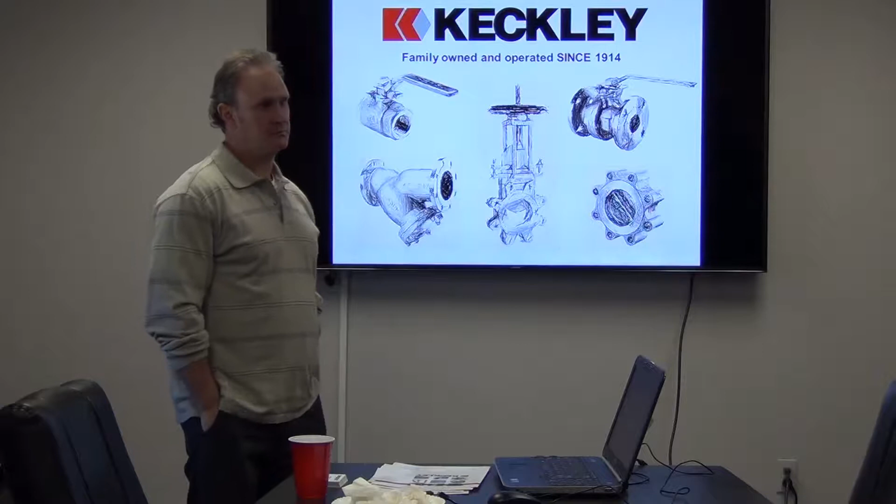Okay, so my name is Andrew Morrow. I'm an independent manufacturer's rep. I don't have any inventory, I don't do any buy-sell. So I'm just literally a catalog and a handshake, a glorified salesperson. I don't have anybody working with me. So those are the lines that I do represent.

I've been doing it this is my 24th year. My father started my company in '75. He worked for Bonney Forge, he was the Bonney Forge sales manager from '65 to '75. My brother is a waterworks rep. I've been working with Keckley now since the end of 2015, so a little over three and a half years.

Mike hired me. It's been a really good working relationship. Our sales has improved for my territory since we've been working together, but with your company, you've been stocking our product a long time, and it's remained a little flat. So we need to kind of see if we can work together and improve that.

These guys are very good at working with distributors and making sure that we help the distributors out to work with the end users and get our product into the marketplace. Mike does a real good job with that. He's always available. We'll come in and see an end user if he has to. I will help with that as well.

But let's see if we can work together and get some of our products and try to beat our competition a little bit more. So that's why we're doing this. We've done this with other distributors, and it's been successful. And Mike flew in today in the wind, so... it's kind of a ride, you know.

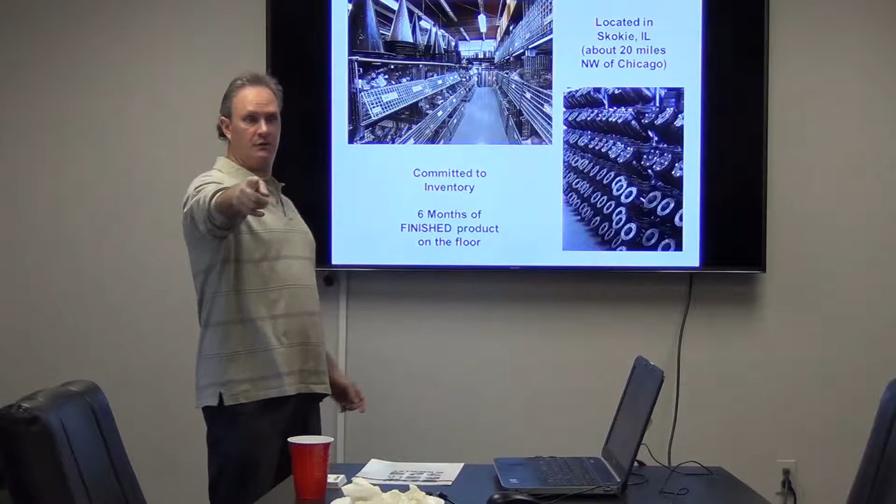The biggest thing I want you to take away from this is that Keckley has inventory. As Andrew said, we support distribution, we don't sell anything direct. If end users come to us, they go to our website and fill out a form requesting a quote or more information. We look at the territory - hey, it's by York, PA - and it goes to you guys, or I send it to Andrew and he lets you guys know. So you guys would be the ones to get the lead.

We'll basically grease the skids for you by going in and giving that end user all the information - this is what you're looking for, this is what we offer. Sometimes they ask for things we don't have, and I'll say here's what you're going to be asking for. I've got stock, now I'm going to send you to distribution and they're going to give you the price.

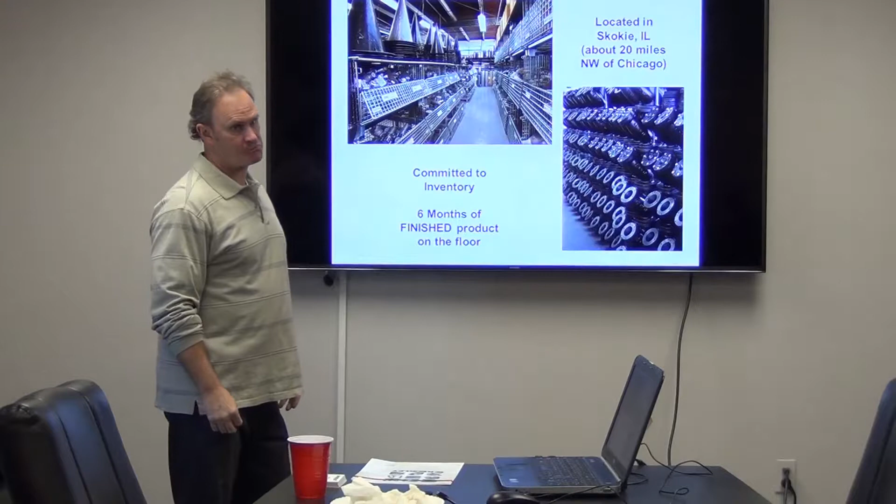So I get about 5 or 6 of these calls a week from end users coming to our website. I call them, and after they send me an email, I feel them out as to where they are, and secondly what distributors they normally deal with, and then I give them a salesperson's name. That happens all the time.

I think in a lot of cases it could be an engineering firm specifying our product on a project. It could be a contractor who just needs a price - I just need to buy a basket strainer. Simple as that. It could be an end user, an OEM that's designing something and has questions.

So usually I try and get that guy ready before I get it to Andrew and to you guys, and then the pricing becomes very easy. You already have a part number and they already know it's in stock. All they need to do is get a price. But the biggest thing here is the inventory.

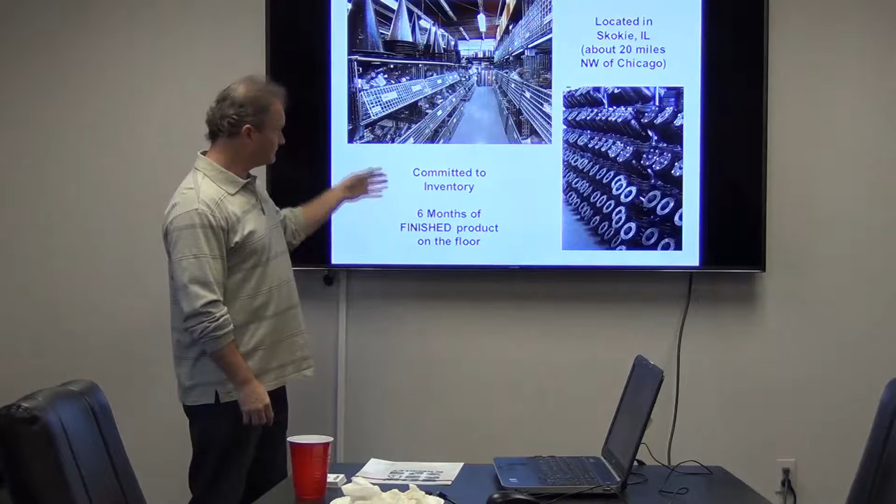No joke, this is what it looks like in our factory - just rows and rows of product. What's that mean for you? When you place an order, it usually ships within a couple days. That's very important - service is what we're all banking on, right? We want to get these products in the customer's hands as quick as possible.

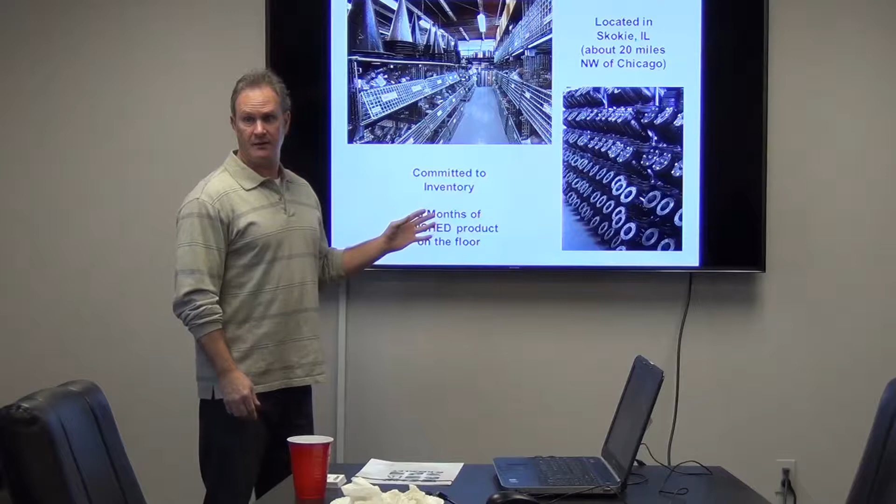We have so much product that if you were to call in, one of our inside sales people, or even myself, might say it could take a day or two to get it out, and that's because we have a secondary warehouse. We were busting at the seams. So we have a Keckley truck that makes the milk run, as I call it, twice a day.

Once at about 7 in the morning, and then once at about 12:30. So we capture orders that came in the night before, or orders that came in right before lunch. Then we bring it - we can't ship out of the other location, it's strictly warehouse - we get it to the Skokie facility, the one on my card, 10 minutes down the road, we bring it in, do whatever we have to do, get it out the door.

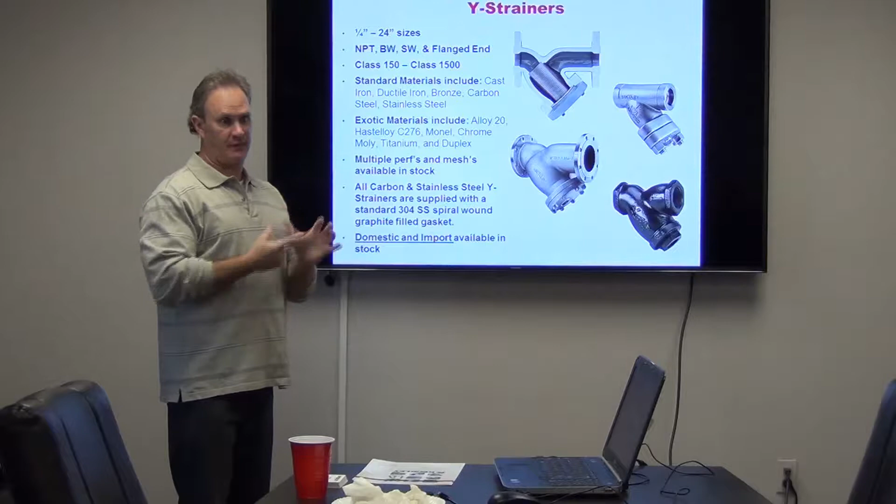There's a lot of information, but we're going to make it very easy. Y strainers still - if you look at the scope, I don't have some fancy pie chart to show you, but when you think about Keckley, still 60% of what we do is Y strainers, basket strainers, fabricated strainers, duplex strainers, temporary strainers. Strainers is still 60% of everything we do. We have other lines that we're going to go over so you have a good scope, but this is still our number one.

For those of you who are new, I'll make it real simple. The reason why you put one of these in line - you have your flow going from left to right, and somewhere down here is a piece of capital equipment, a pump or something you want to protect. This Y strainer, the media comes in and goes out, and whatever debris we want to remove from the line gets caught in that screen. Simple as that. You'll see on a basket strainer it's the same thing, just a basket strainer. But that's what a Y strainer is.

When we talk about terminology - screens, and I call this the strainer. The whole thing is the strainer, and I call that the screen. That's a replaceable part.

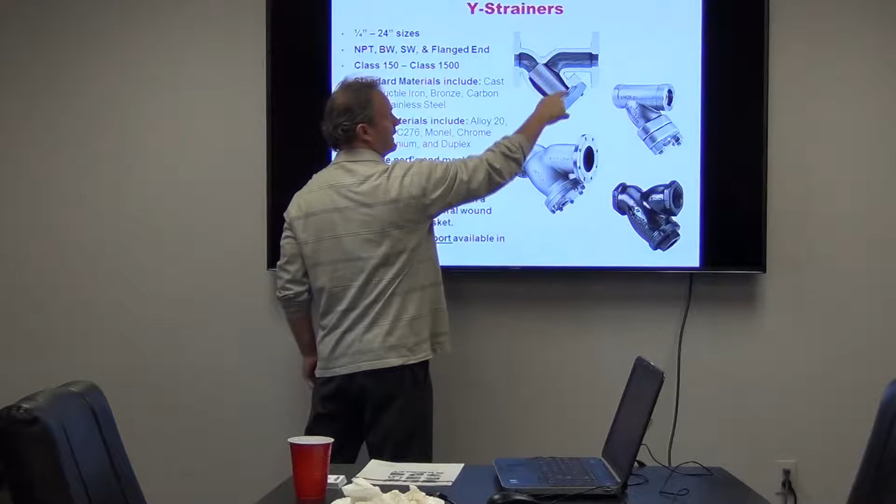We build and ship those all day long, and then you have a gasket right here. Those are the two items that probably get ordered the most from us because somebody's always changing out a screen or they take it out and clean it.

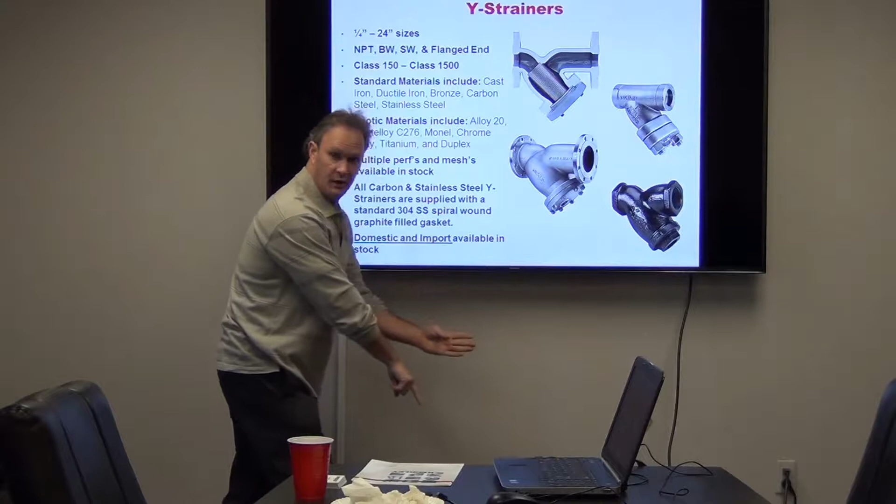The other way they might do it on a Y strainer is you notice how there's an open hole right here. That's what we call the blow-off connection. Instead of having to remove this cover, take the screen out, clean it, put it back in and bolt it back up, they could put a nipple and a ball valve on that and just blow the debris out. So they might have this Y strainer sitting down low in line, with the ball valve pointing toward a drain, and they could just blow the debris out with the pressure from the system. That's why you have those blow-off connections on all these. That one doesn't have it, but every one of these has a blow-off connection.

Okay, so lots of sizes, right? We go 1/4 inch all the way up to 24 inch. Threaded, butt weld, socket weld, and flanged end connections, okay?

The class is just your class of flange, like 250-pound threaded or 150-pound flange. So different classes of strainer that we have, and that's to handle the pressure. And now we're talking about pressure. 150 is obviously not going to handle a certain amount. The 1500 is going to be high pressure, like 3700 pressure. We can handle a very high pressure line.

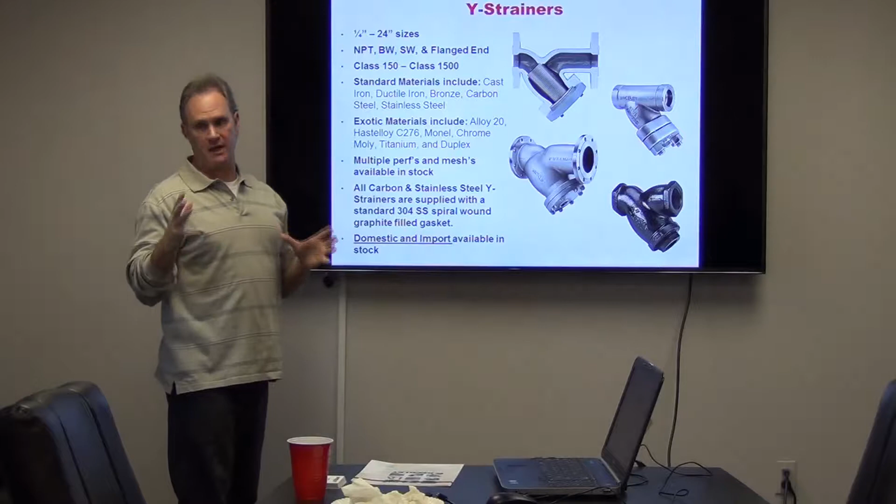This is the main thing you want to look at. Standard materials: cast iron, bronze, lead-free bronze, ductile iron, carbon steel, and stainless. Those are the main ones that are going to be on the shelf. But in some instances, you're going to have people that want something unique, right? So they're going to want an alloy 20 or a Monel or a chrome moly. Titanium - you know what, you want to sell titanium strainers. Really expensive. It's got to be on the right line, right? It depends on the application. That's why you would use a different type of material versus cast iron, which isn't going to be able to hold up to certain medias.

Multiple perfs and meshes - that's our screens. We build them all day long, a couple days out the door after an order comes in.

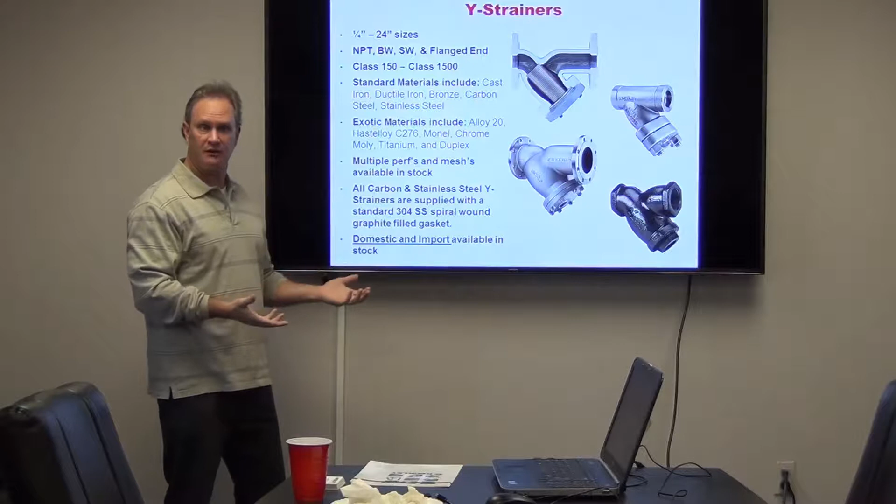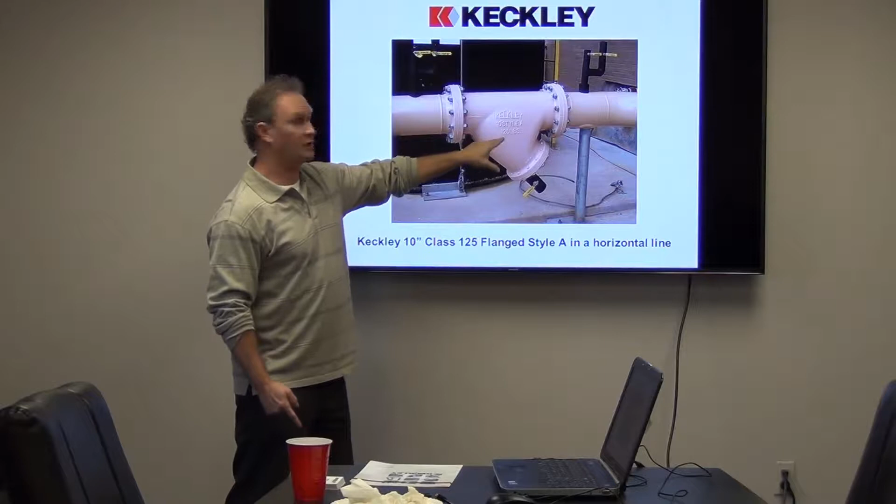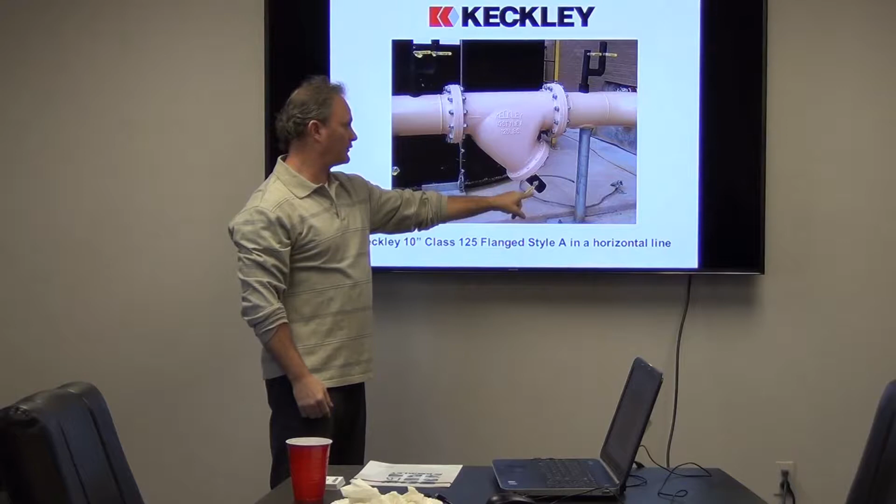We're going to go through these quick, these are just visuals, right? Remember we talked about the line? Here's the flow. This is a 10-inch, 125-pound cast iron in line. We got the flow arrow so we know which way it goes. You could put these things in a vertical position, but you'd always want to have the Y pointing down. So as long as the flow is coming down this way and not going up - obviously you don't want to have your Y strainer pointing up. There's an instance where they have the ball valve there to blow the debris out. They don't want to have to open a 10-inch each time, okay?

Question always comes up: why use a basket strainer over a Y strainer? It's really pretty much preference. Sometimes they want a basket strainer, sometimes they want to use a Y. Basket strainers take up less space too.

Yeah, it could. When we talk about face-to-face dimensions, that's the flange to flange, and it could be less. But you can't hook a ball valve to it and blow the debris out. You have to remove the cover.

If you look in this brochure, up at the top where it says basket strainers, you'll see some of those have knobs on top, that's a hand tightening knob. So they can do that without pulling a wrench out to open it up. That becomes a very big selling point for people putting in basket strainers, because now I don't have to turn a wrench, I can just hand tighten, but your pressure's lower. You're not going to be able to get that in a 300-pound flange, you have to do that in a 150. You can't have high pressure with those hand tightening knobs.

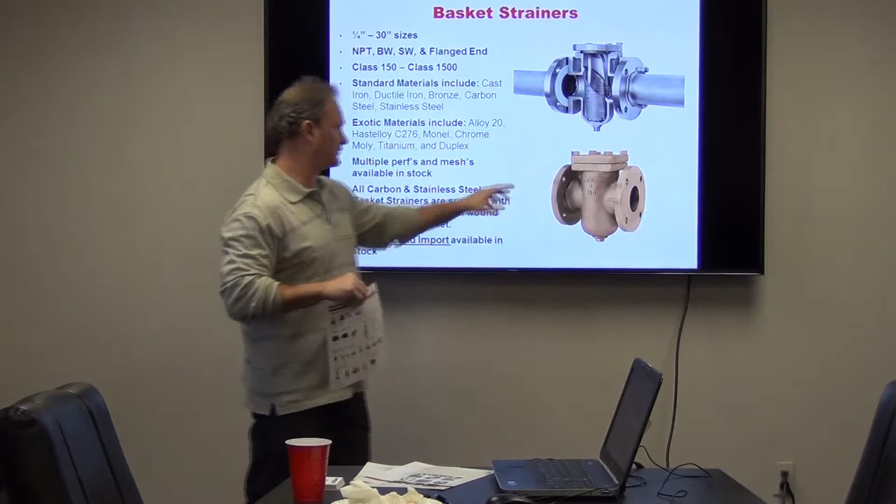This picture doesn't show it, but just so you know that is an option. It doesn't always have to be a bolted cover. Once again, sizes 1/4 inch to 30 inch. When you get to 30 inch, it's fabricated, so you want to make sure we don't have a cast unit that's 30 inch. Same deal on the connections: threaded, butt weld, socket weld, and flange. 150 pound all the way up to 1,500 pound.

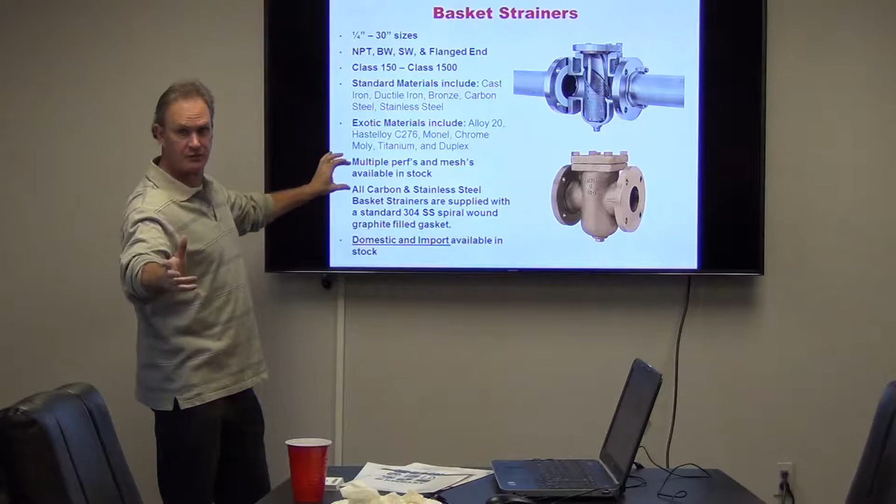Our standard materials look kind of like our last slide: cast iron, ductile iron, bronze, lead-free bronze, carbon steel, stainless steel. We can get the exotic alloys if we need to. Multiple perfs and meshes, we make screens all day long. And standard gaskets, we supply standard gaskets. There are special gaskets you can get too, but it depends on the application, and domestic and import available.

There are all types of applications. These things are found in high-rise buildings, universities, hospitals. I'll give you one: Hershey's, chocolate. They have them in the chocolate. You tell me it's going into a plant that's producing chocolate, the first thing I'm going to tell you is it's going to be stainless steel. They don't want carbon steel or cast iron. It's going to be a stainless steel basket strainer, and they use them.

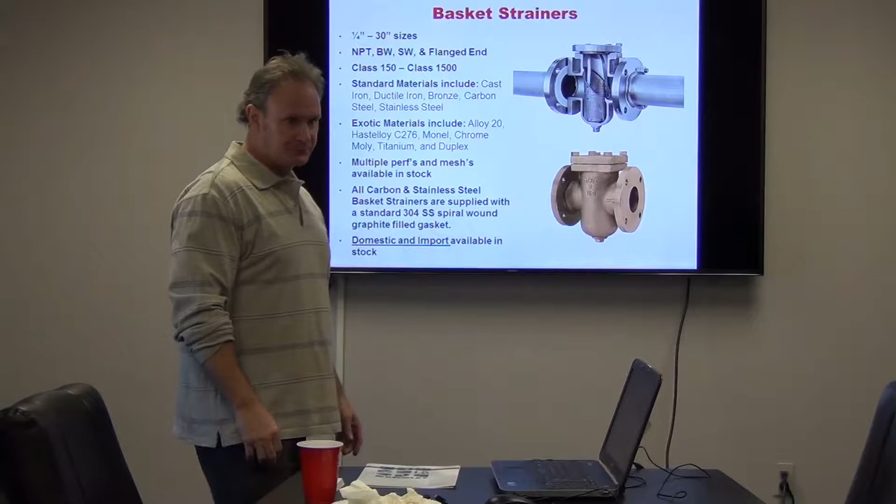But a new high-rise building in Philadelphia will have $100,000 worth of cast iron strainers. Again, why are they putting in Y strainers and basket strainers? Because they want to protect some capital equipment downstream, period. We'll talk a little bit about other ways to do it too, there's a couple other ways.

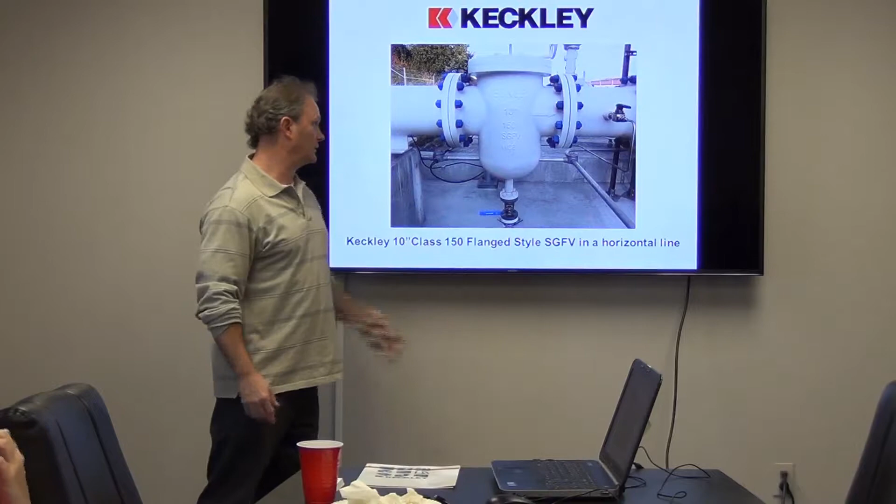This just shows one in line. Once again, they have a ball valve there, but that's strictly to drain it, not to blow the debris out. They still have to remove a cover. That's a 10-inch, carbon steel unit on a line. A lot of times, how that looks great and new and everything, these contractors will find one that doesn't look new, looks like it's been there for 30 years, but it'll say Keckley on it, and they'll call you to replace it as a Keckley.

A screen or a gasket. Now that's where things get a little tricky. Sometimes you call in and say, I've got a guy who needs a replacement screen. Is it a Keckley? Yeah. Okay, which one is it? I don't know. Okay, we got to find that out, we got to find out what it is.

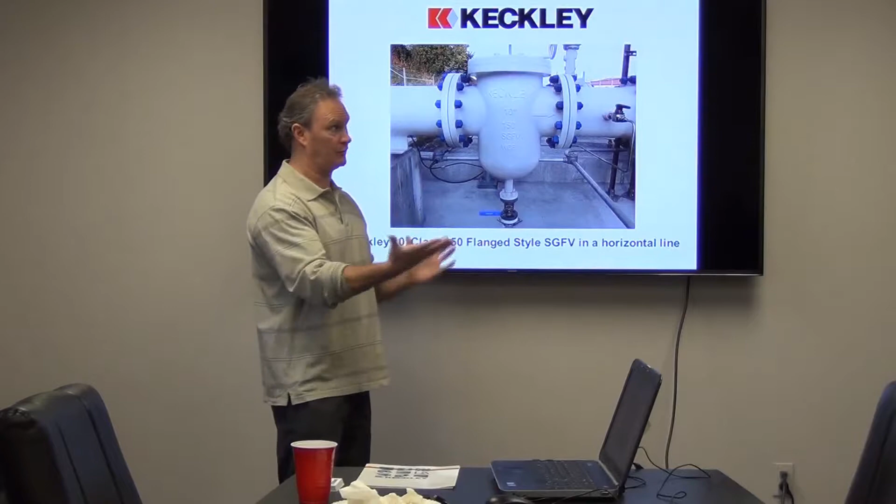Sometimes there's insulation on these, they sit out in a plant or somewhere there's insulation. We got to find out what it is. We can always take the dimensional measurements, that's a little more work than just saying, oh it's an SGFV, it's a carbon steel, or it's a D, or an A7 or something. So those are things that'll come up when you're ordering screens and gaskets. We got to identify what it is so we make the screen to the right dimensions. They're all different, every screen is different, and every screen is different from us to our competitors.

So if it's Mueller or Titan, our screens don't fit theirs, theirs don't fit us. What we can do is build screens for our competitors, but because we don't have a master file, we need the dimensions, and we can build those if it ever comes up. Ideally you'd just go right to them, but we do it.

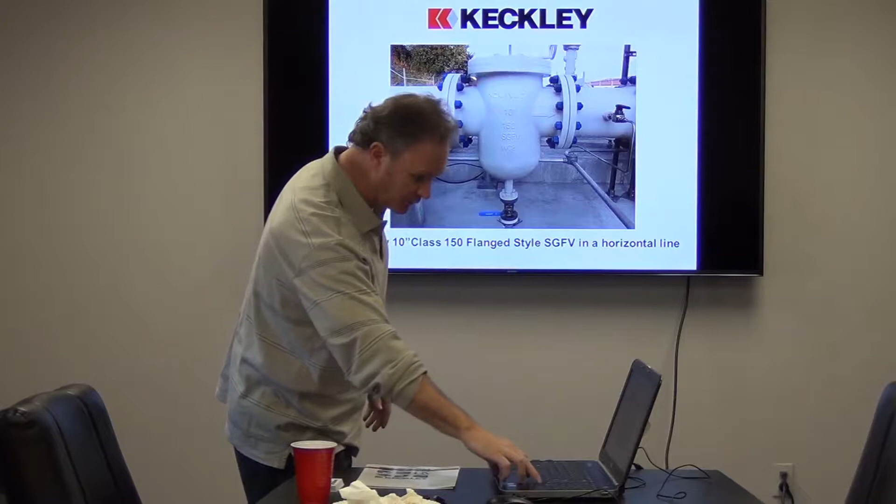Duplex strainers, just like our Ys and basket strainers, we have a duplex strainer. Why use a duplex over a regular basket strainer or simplex basket strainer? Because you have continuous flow.

So you can see here's the flange of the unit, and you see two chambers, and this handle. That handle is to divert flow from one chamber to the other. Now I don't have to shut down my system to clean out the basket strainer like a couple slides ago. All I have to do is move it to one side, and that side gets drained. There's a drain, doesn't show it very well, but we drain that chamber, take the screen out, clean it, put it back in, move the handle to the other side, and do the same on the opposite side.

Continuous flow. What I want to instill though is, this isn't cheap. We've got moving parts inside of here. This is a fabricated unit utilizing butterfly valves to divert the flow. We build these in Skokie. These are honking big units, very, very robust, and they're great units, but this stuff isn't cheap.

You're starting to get into these types of strainers, you're going to see it's pretty much triple the price of a simplex basket strainer. So usually I tell the end customers when they call, don't fall out of your chair when you get the price, because it's expensive, okay?

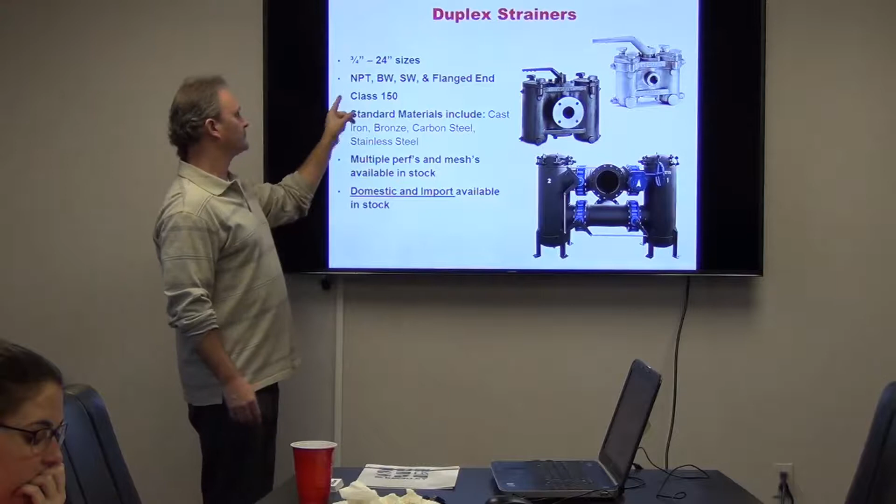3/4 inch to 24 inch in size, 150-pound class. When we get into the 300-pound class or 600-pound class, fabricated, we're no longer in the cast units. Of course this guy sits in the cast unit slide, but let's just assume he didn't. We go fabricate if that happens.

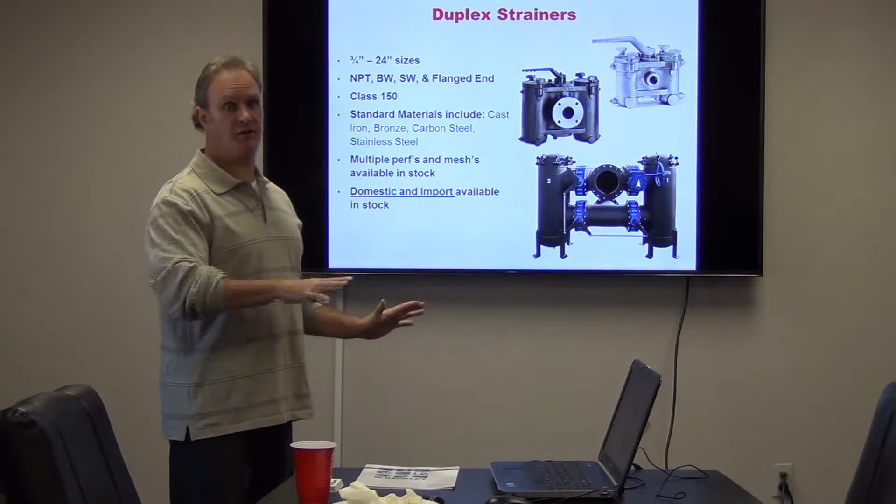Multiple perfs, import and domestic. The main ones you're going to have here are cast iron, carbon steel, and stainless, period. If somebody needed something different, we could do it, but they're not cheap. And now you're starting to get into those exotics, it becomes very expensive. And we have 5 full-time ASME welders that do that.

So, fabricated. Andrew's my lead-in. When we're talking about fabricated strainers, Ys, Ts are always going to be — we don't have any of those on the thing. It looks just like a T, right? And the screen sits like this. Once again, flow from left to right, captures the stuff, you pull it out. That's a simplex strainer, a little different design.

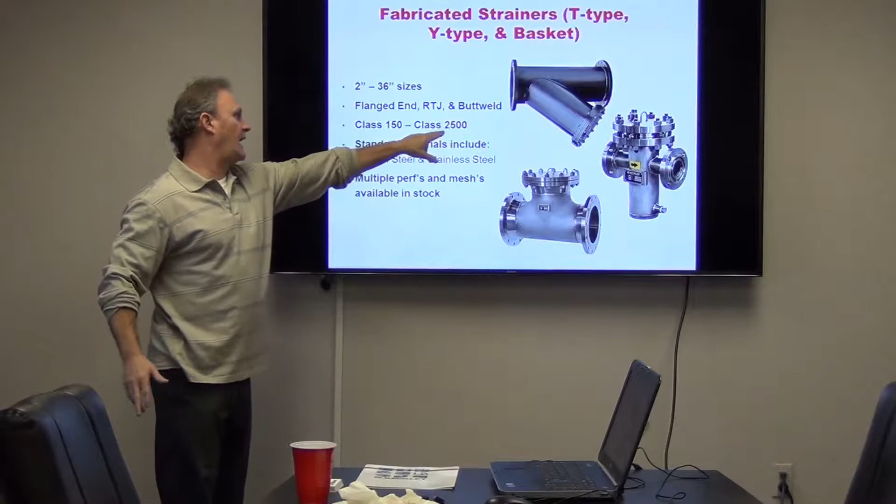2 inch through 36 inch. Flanged, butt weld, RTJ, whatever you want to get, we can make it. We could do even higher than 2,500 because we're building it. We're procuring pipe, bringing it in-house. One of our 5 ASME certified welders welds it and puts it together.

The general rule of thumb on those, because it's a rotating schedule that we have with our welders — T-strainers are usually the quickest, the fastest one we can build. Those usually have an estimated lead time of about, in the small sizes and small volume, 4 to 6 weeks. On the high end, 8 to 10. All the others would be 8 to 10. Even on a duplex, about 8 to 10 weeks is a good rule of thumb.

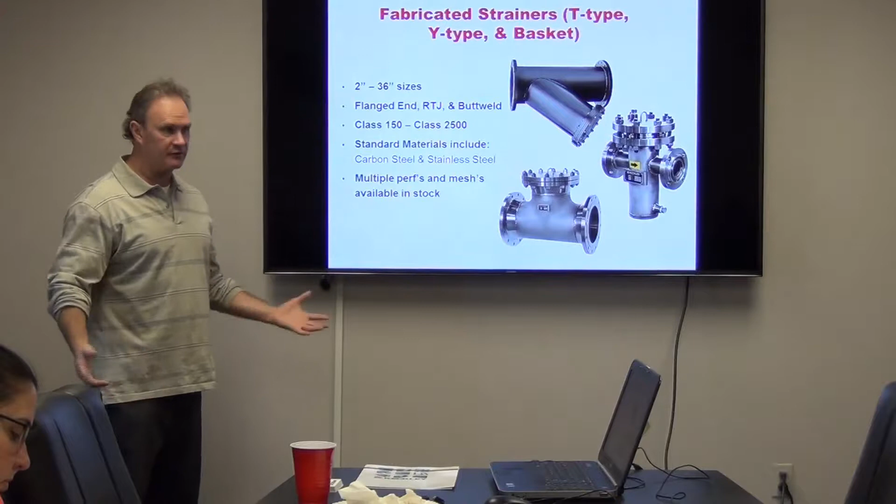So if your guy calls you and says, hey, I need a fabricated duplex strainer and I need it in 2 weeks, you didn't plan well, because now we're not going to be able to do that, okay? We're going to show you a couple other things we do, but the fabricated really gives us a lot of flexibility. We can take a simplex strainer, carbon steel or stainless, and add taps on the inlet and outlet, so they can put gauges on there.

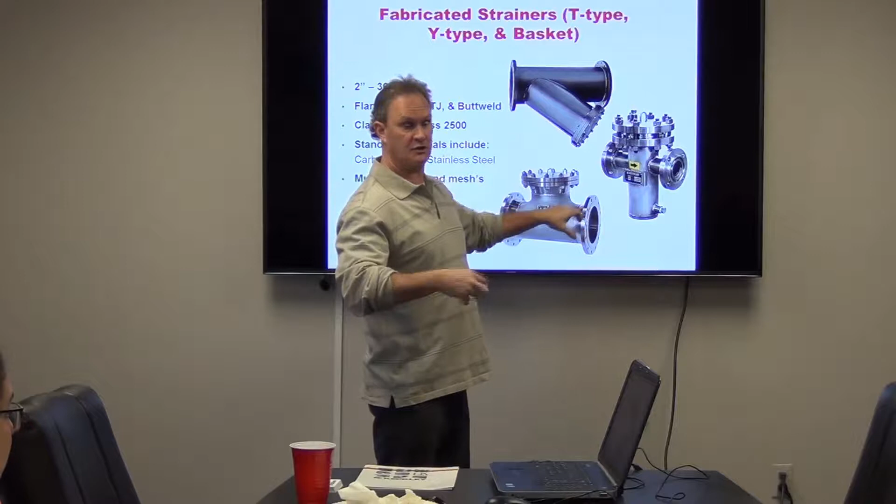So they could put a gauge. They'll ask for like a 1/4 inch NPT tap. We can tap into those on a cast unit, or we can add them in on a fabricated unit. That's just so they have a gauge, so the guy can see when there's pressure loss from our inlet to our outlet. He can look at that gauge and go, hey, I got pressure loss here, I might have to clean that screen. Because if it builds up enough, the screen will collapse.

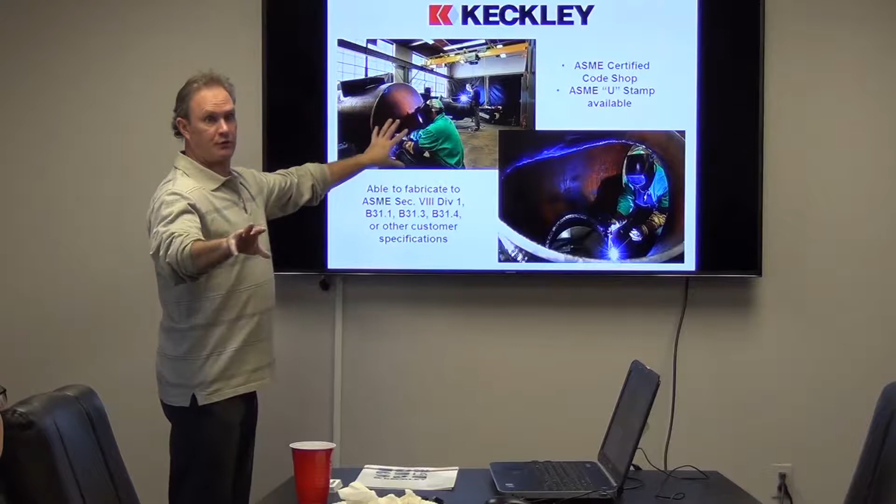There's a lot of pictures here now. We're getting into the picture portion. You see the welders working. Two welders are doing smaller diameter stuff. Three welders really get involved in the big diameter stuff.

This is just more stuff. I'm not going to dig deep into this, but these are things you would see on a specification. If you see something that says code stamp or U stamp, that's when it's a pressurized vessel and it has to be fabricated. So if you see that, you automatically know it's not going to be a cast unit, it won't be out of the catalog. It's fabricated. When you see that, we do that in-house. A lot of our competitors don't do that in-house, they're not a certified code shop.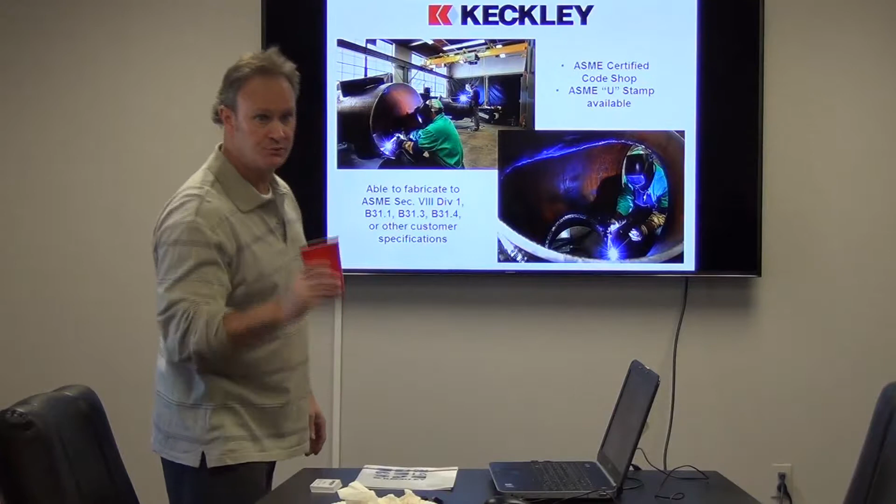This is the other thing that'll tip you off: ASME Section 8 Division 1. You see that, it's fabricated, period. You'll see a spec and you'll go, what does all that mean? Fabricated. You send it over and we'll get it quoted for you. So if any of your customers ask you if you sell fabricated strainers, absolutely you do. Just have them send you the inquiry.

You know, it's really pretty simple. After our engineering gets it, when we get you a quote and your customer wants to move forward, we produce a regular line drawing with all the details, so they have all the dimensions with a signature box. They sign it, place the PO with you, and you guys just sit back and wait for it to be done. Don't let the word fabrication scare you away.

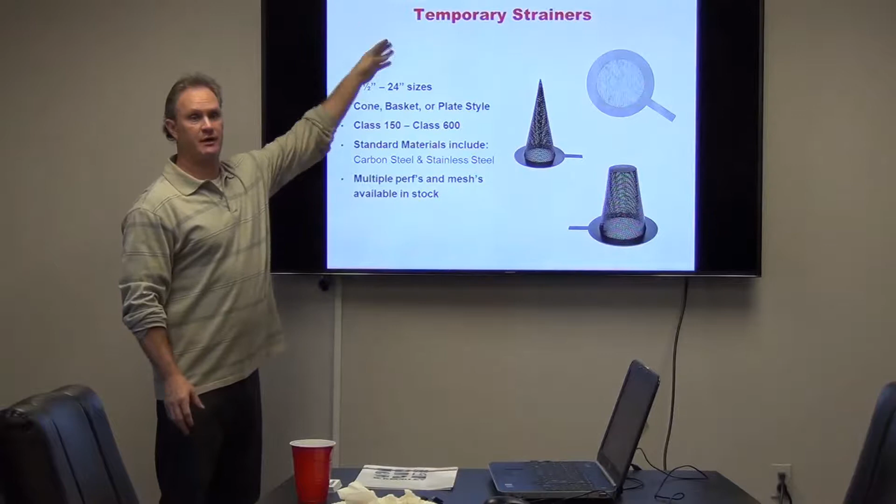Yeah, we talked about another way to do it: temporary strainers. All temporary strainers are built to order. We build them in-house, and they're done in about 2 weeks, maybe 3, depending on our production schedule. Here's the terminology you're going to hear them called.

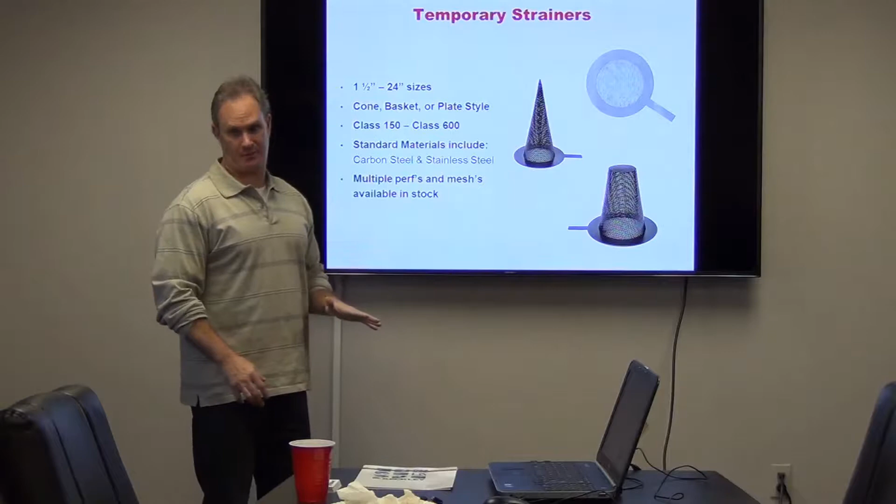Witches' hats - looks like a witch's hat. Pilgrim hat - looks like a pilgrim hat. These are used primarily in startup. So the guy puts together a line, he's got piping all over. Before he clicks that switch on, he calls up and says, yeah, I need an 18-inch temporary cone strainer. He puts it in line, turns the switch on, the line starts, and all that debris, all that junk that hasn't been cleaned out, gets captured in the temporary cone strainer. This thing sits between two flanges.

When they're done with the startup, they take that out and put something permanent, like a simplex strainer, a Y strainer, or a duplex strainer. So you'll often see these called startup strainers. You say to yourself, wow, that seems like a lot of work, right? We're going to build this in 2 or 3 weeks, put it in line, turn the system on, all the junk's going to get caught, and then we're going to take it and throw it away. That's what they're supposed to do. Not everybody does that - some people leave it in permanently, but they've got to remember to take it out and clean it because stuff is getting stuck in there.

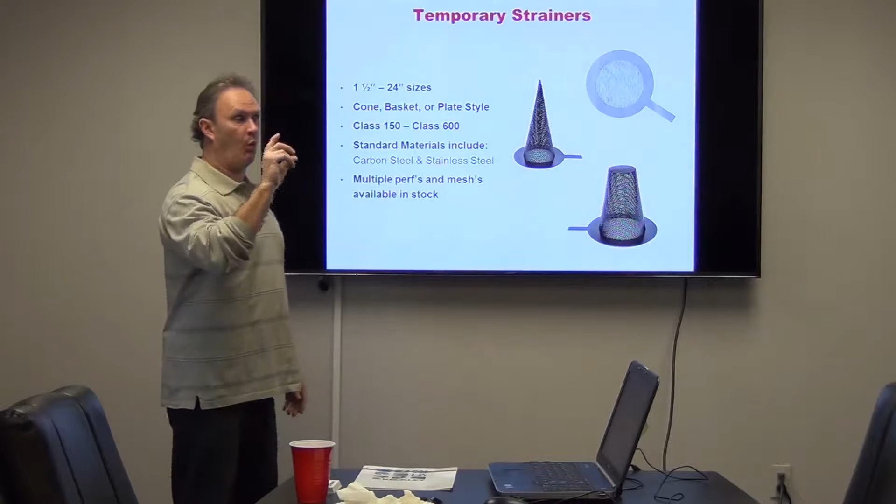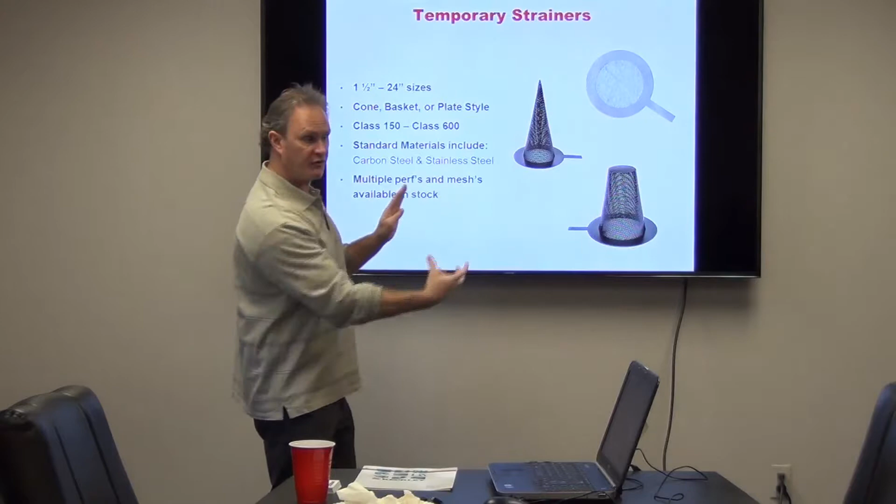The other thing is there's the newest thing you're going to see. I've seen it - I've been with Keckley 10 years, and I started seeing it within my 2nd year there. People want to bypass having to do this. So if they bypass and don't want to use a temporary strainer, what they do is get a Y strainer, and their description on the screen is going to be '40 mesh, lightly tack welded for startup.' So instead of putting that temporary strainer in line, they already have the piping laid out for a Y strainer. They turn the system on, all the junk gets caught in that screen, then turn the system off, take out that screen that's lightly tack welded. We've welded an interior screen to that, and I'll show you what one looks like - we'll show and tell here. What they'll do is they'll tear that out.

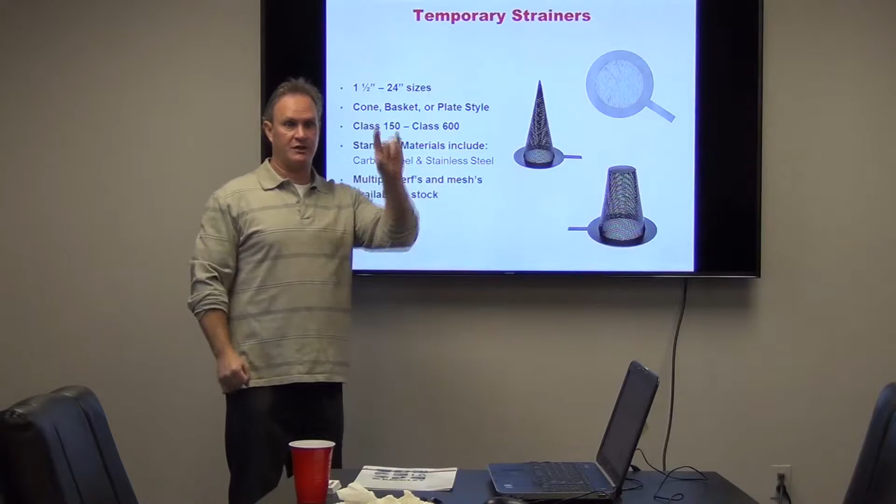They actually tear that lining out of it, and then they're left with like a 1/8 perf. It's almost like a dual screen. Here's again how we do two screens - that's what they call a mesh line screen. So they've eliminated this whole thing. Now I don't have to do all that with the temporary. My Y strainer's already in line, the face-to-face is already set, and I just take a pair of pliers, tear out that mesh.

I'm left with that exterior 1/8 perf, pop it back in my Y strainer and go. You'll see that on specs, I see it all the time. Sometimes they'll get fancy on the specs and say, after startup the screen is pulled out, we want 50% open area. Well, we have a way to do that by changing the perf to a 3/16 instead of a 1/8, and now that's their surface area through the screen, okay?

So carbon steel and stainless are the two main materials. Yeah, there's some guys out there that'll come and ask us for an alloy 20. Why? You're throwing it away - you're going to take that thing and throw it away, you're going to spend all that money. We'll build it, but they usually don't. Carbon's the most common, 304 or 316.

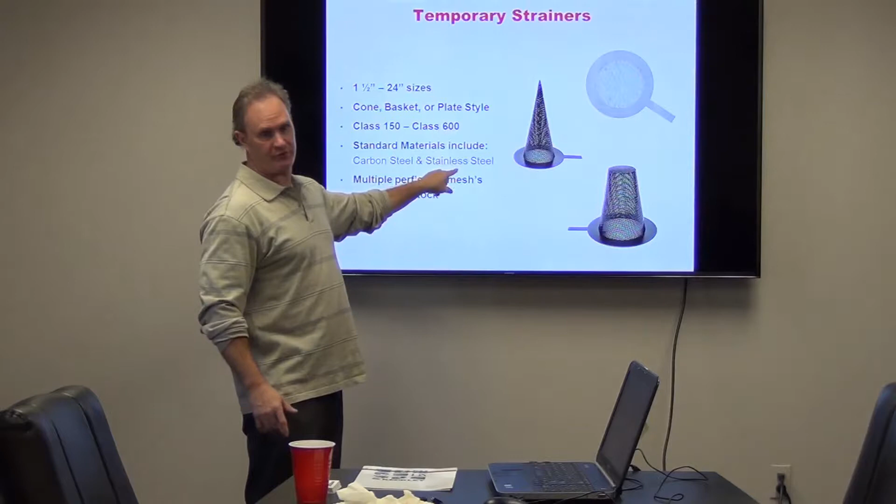And again, multiple perfs and meshes. One thing you want to remember, you'll get this question if you call in - you say I want a temporary cone strainer and I want it 40 mesh line. And I might say to you, do they want the mesh on the interior or the exterior of the cone? And you're thinking, well, that's a dumb question. It really isn't - it depends on the orientation of that cone.

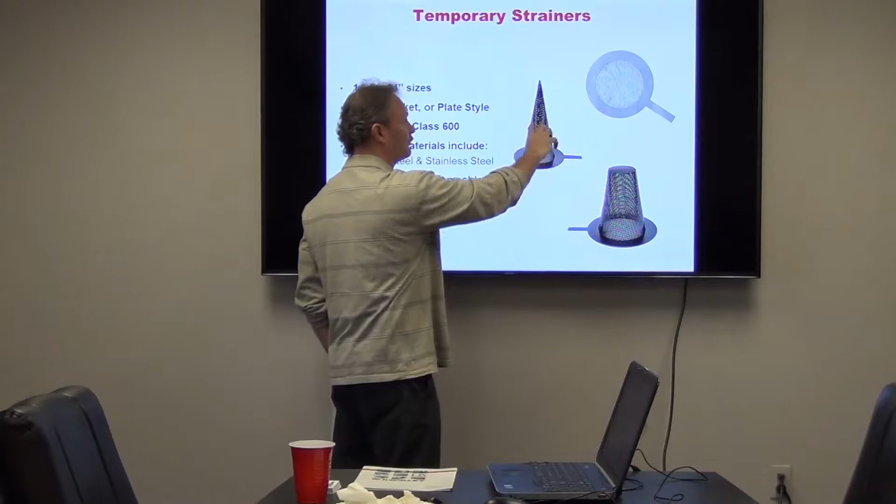You would assume the cone is facing with the flow, so all the stuff is going inside, and the mesh has to be lined on the interior. Not always - sometimes they don't have the room to go that way, so they invert it, and then they put the point that's facing toward the flow meshed on the outside. Makes a difference. That's a question that'll come up, and you'll go, that's dumb. Nah, not really.

This just shows you some of the stuff we did. We'll get through this stuff quick, the rest really kind of moves along because we're going to go into the other products. We do a lot of specialty stuff - these are all fabricated special strainers. Sandblasting and epoxy coating, yes we do it. Stainless steel tagging, yes we do it. Earthquake proof, huh? Yeah, we do it.

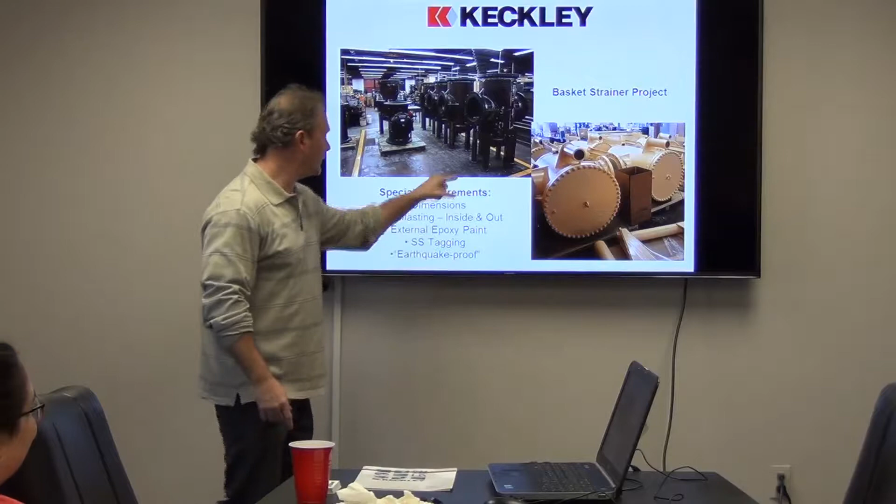See these legs? That's very unusual to have six legs like that. This was for a job in California - hey, they got earthquakes there, earthquake proof. There's bolt holes there, they bolt that stuff in, so now if there's an earthquake, the sky is falling, and this thing's moving, it doesn't come apart. We'll do it.

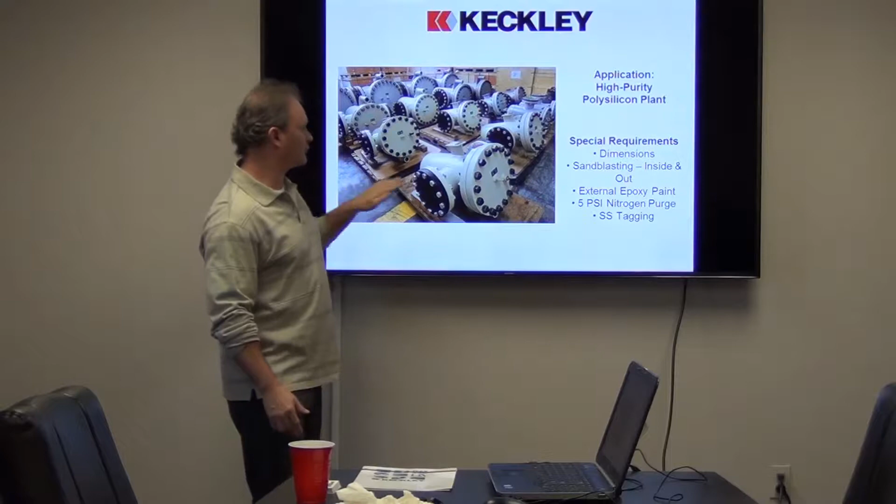This is for a polysilicon plant. This was just one showing that we were able to do some nitrogen purging. This stuff is - you'll know when you see it, you'll go, what the hell is that? We can do it. So you'll see gauges on these, and these are all laid out on pallets. Very, very big job that we did.

That's strainers. Any questions on strainers? Anything that's burning you? That's what you guys buy the most from us - if I looked at a history report, you guys are Ys, baskets, temporary cones, stuff like that. Okay?

Switching gears - check valves. Now, there's a lot of guys that do check valves. Takeaway for you guys is Keckley, very price competitive with the Nibcos and the Cranes of the world. That's what you guys probably would compete with most. There are three types that we really deal with.

There's what we call the double door or double disc - that's just a double disc with a lug body, that's a wafer. And then we have a center guided - that's a center guided globe, and we also have a center guided wafer, which is a CW. That's a CG, that's a DD, that's a DD, that's actually a DL. But this is a CG, a globe style body, center guided. So there's a stem in the middle and the check valve goes up and down.

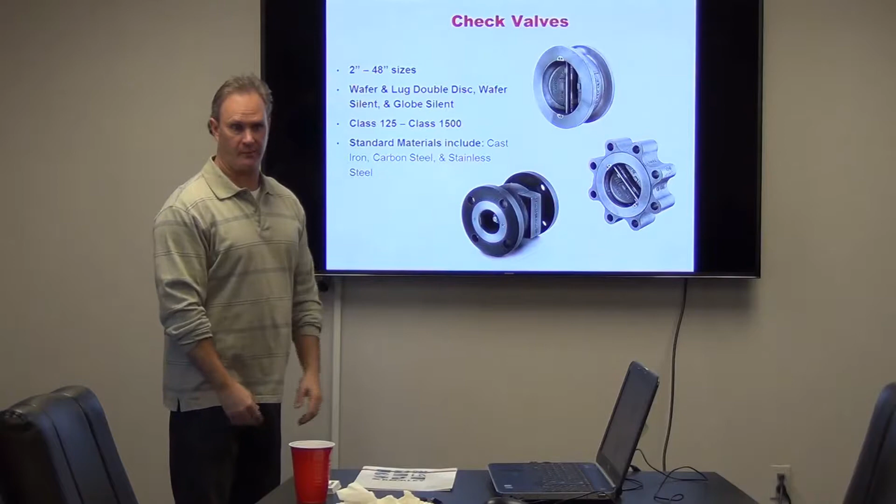Why do you use check valves? One reason - you want to prevent water hammer. You shut your system down, all that water starts going back, this check valve will close. You could have it on - I have one in my house. In Chicago we have sump pumps, well I never want the backflow to come back, so I have a check valve. When the pressure comes the opposite way, it stops, nothing's getting through. So that's just a way to protect the line. You see check valves all over everything.

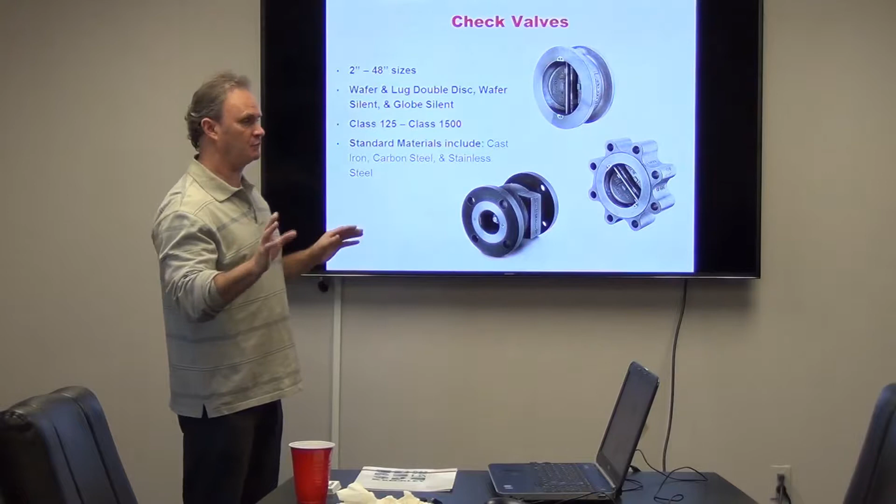125 to 1500 pound ratings, that sounds really nice, but we really stock 125, 150, and 300. We do some 600s on a 600-pound rating, that's a lot of pressure, but it's not common. Cast iron, carbon steel, stainless, simple as that. These will often have a seat - inside it'll be Buna, Viton, EPDM, or no seat, metal to metal. They don't care if it's bubble tight.

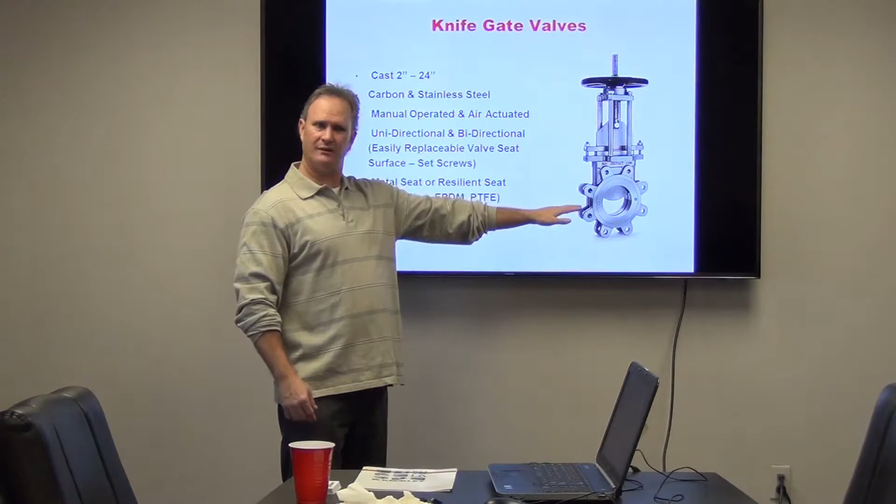Yeah, there's guys that use them in microbreweries. I've seen it, I've gone in them. They're like, what? Yeah, they use them in a microbrewery. Not ours, because in a microbrewery what does it have to be? It has to be FDA approved. Even if it's a fully stainless steel unit, you're not going to use ours - I don't know what's going through there, you don't want to drink your beer and die. This is for slurries, just nasty, nasty stuff.

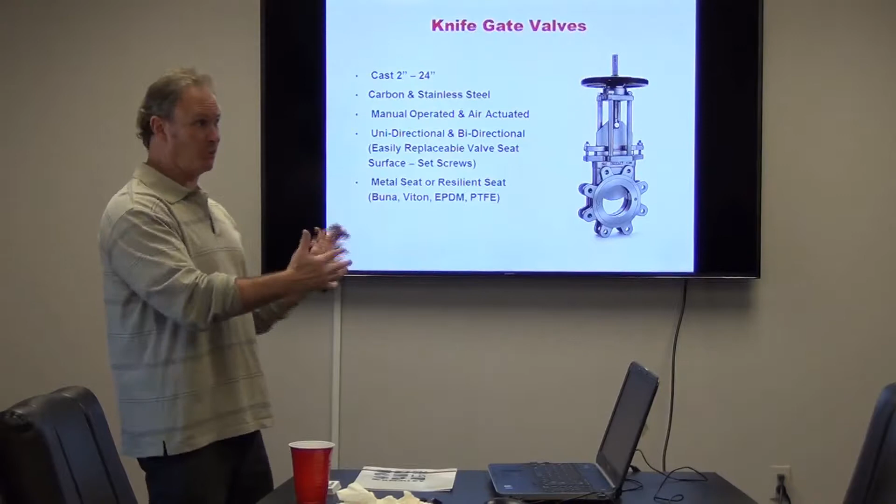I like to say one thing - they're available as one way. It's an import. Check valves, import. Knife gates, import. Low cost, carbon and stainless, that's it. Makes it very easy. You're going to bump into guys like Orbinox, Tyco, Line Valve, Velan - those are your competitors, they have a huge breadth of offering. We have a very narrow scope. It's low cost, it's an add-on, that's really all you need to know. If you're out there seeking knife gate opportunities, you'll see that we're limited in what we can do. It's very bare bones offering.

That's how we offer it. And you'll know when somebody comes in asking for one of these things - it's under our website, under pump accessories.

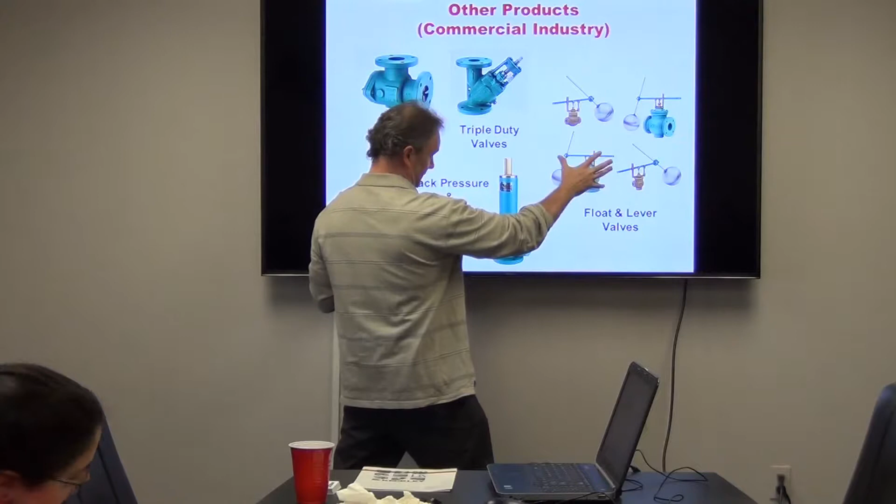I'm not going to get into these really heavily, just so you know that we offer float and lever valves. We still sell a ton of these - these things will be in service for 30 years, 100% domestic. Back pressure and relief valves, yeah we offer them, typically for lower pressures, 100% domestic, all built to order. These are probably a week out. If we have to do a larger size, you're probably looking at 3 to 4 weeks. These can go anywhere from 2 weeks up to 6 to 8 weeks to build them.

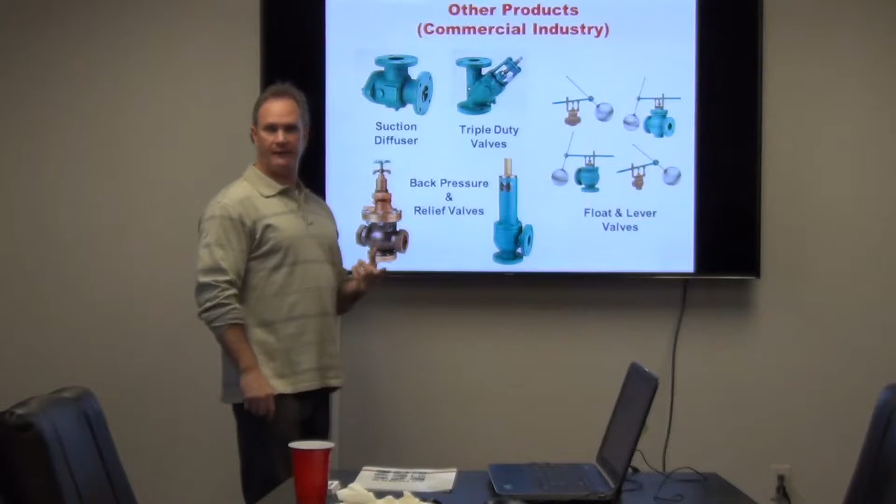Those are what we like to call the legacy products - that's where Keckley started. Before we got into strainers, we were these, and we had a huge scope. Who are you going to bump into with these? Watson McDaniel, Spence - they got bigger offerings. Spirax Sarco, right? That's where you guys there. Here, really nobody - nobody still does industrial float and lever valves.

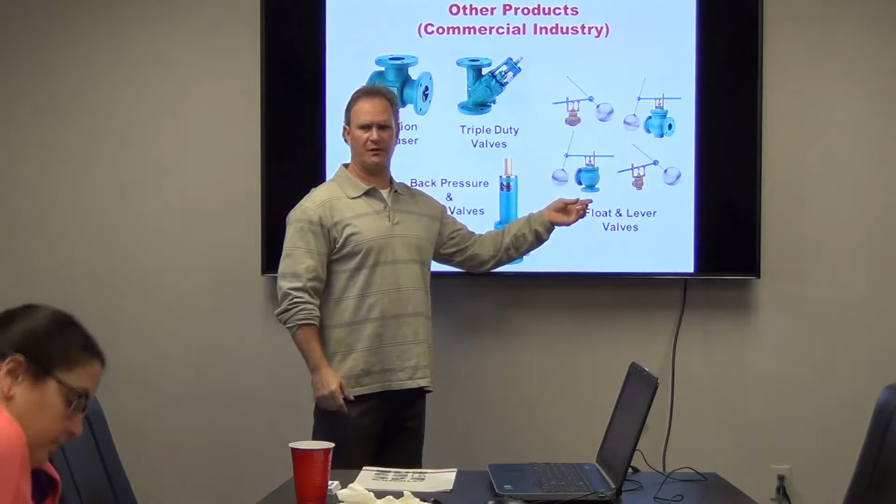You might get your customer who's looking at a Grainger catalog, and he finds some very small float and lever valve. That small float and lever valve is like a quarter of the price of yours. Not the same, they're different. They're low cost, they're not meant for heavy use. These are meant for heavy use. So just remember that.

Well, I'm going to move through this one real quick. This is the last item we have that we offer.

It's going to be our ball valves. Ball valves have been around now for about 4 or 5 years, I kind of lost track. This is one of those ones that we have to get on the AMLs.

So this isn't your bronze, low-cost guys. That's not us. This is typically for higher pressure. I'll pass one of these around. Two materials, carbon steel and stainless, that's it.

Here's one of them. Why would we get into this? There's 100 guys that do ball valves. Why would we get into it? Because the stuff we do is really more specialty. It's not your bronze, it's not your low-cost stuff. Andrew's pulling out some flange stuff there. That's a honking big unit.

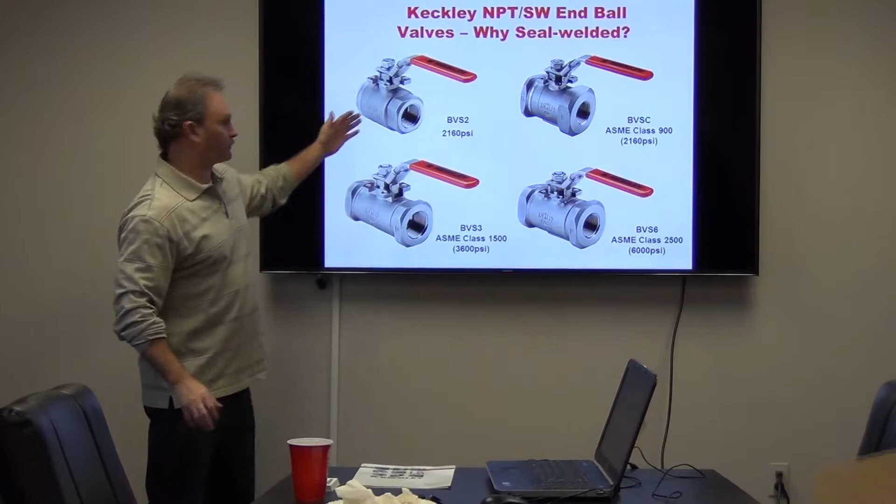I'm going to make this super easy because I don't want you to worry about part numbers and all that other stuff. What did we do? We offered basically threaded and socket weld, stainless and carbon. Very simple. And each one, if you look at it, goes up in pressure. So look at that, 2160. Sometimes you'll see ball valves rated at like 150 pounds. 2160, 2160. BVS2, 2160.

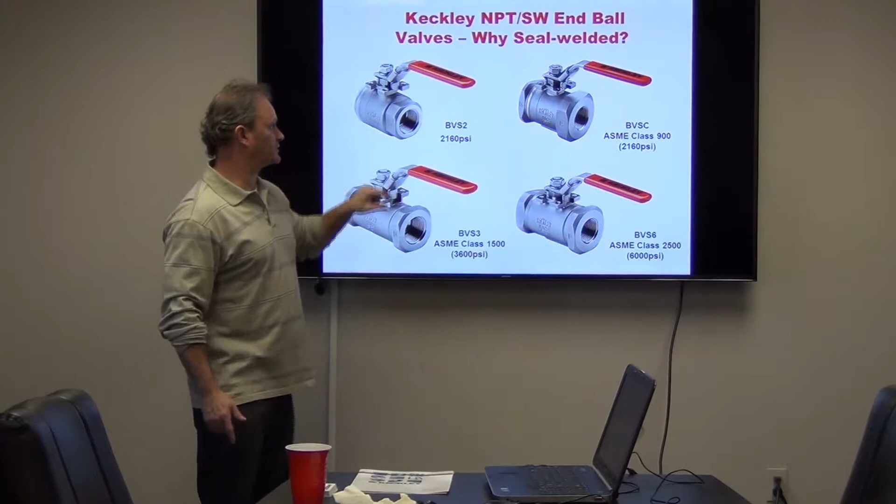BVS-C, why has that got a C? Because it's got a thicker wall, and we'll go into it quickly, but just so you know, it's still 2160, but this becomes a different version. It's for higher pressure, you'll know when you see these on specs. Then we move up to the 3, 3600. BVS 3, 3600. BVS 6, 2500 or 6000 PSI. High pressure, that's all you need to remember. Because if it's low pressure, they could come buy it from us, but it'd be overkill for their application.

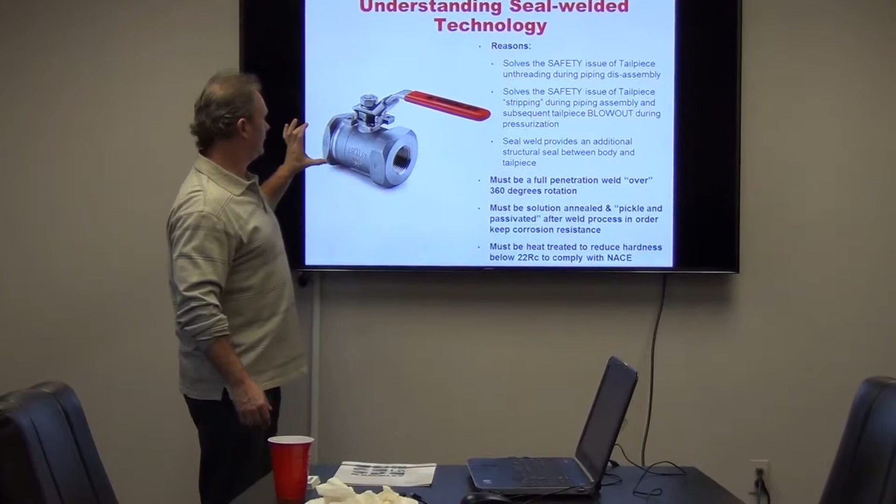Once again, I'm not going to go through all these things. I'm just going to tell you why we did it. The biggest thing is, see this weld right here? This is what they call a two-piece seal welded ball valve. That weld ensures that if somebody's doing work on a line and it's 2,000 pounds of pressure, that this thing is not going to come disassembled. Because if that thing ever came disassembled, the ball that's in there will shoot out and kill somebody. And it's happened. That's why two-piece seal welded ball valves came around.

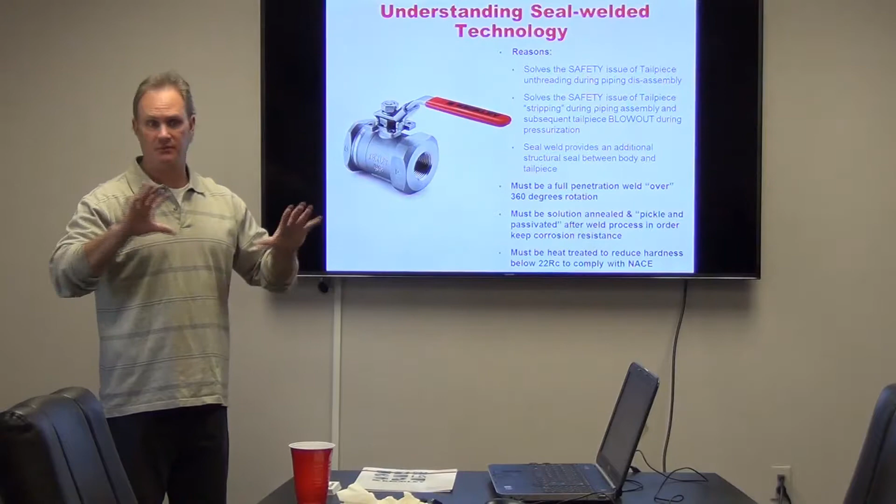These are the guys like the Jamesburys, the Quadrants, KF. Those are the guys that have these seal welded. This isn't going to be your Apollos. It's not going to be your Sharps. Different realm, different stuff. So that's why we did it. That's the main reason. The number one reason is just the safety issue, the fact that this thing won't come apart.

Yeah, these other things are important. A 360-degree weld, we went all the way around. Pickled and passivated, yeah, there's a process. Once you do that, it has to be cured. So I don't want you to get too fixated on that, that just gives you an idea.

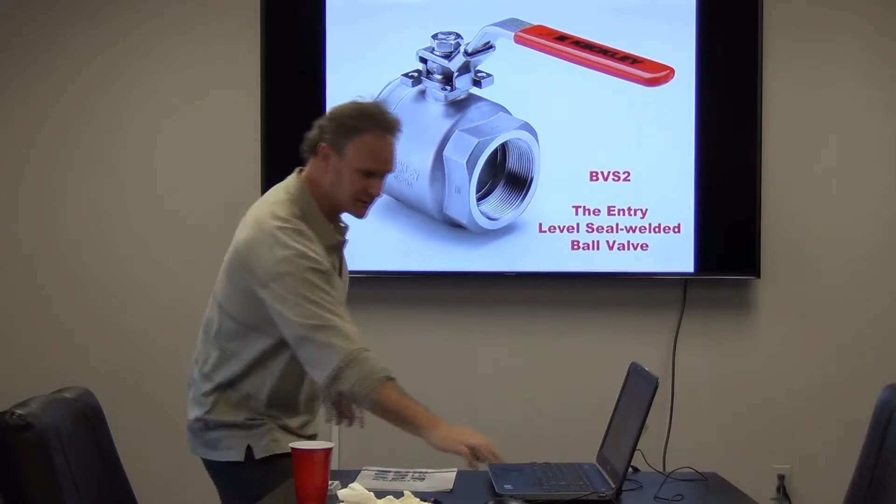And we'll go through them quick. Entry level is BVS 2, 2160. That's all the features that come with it. Full port, seal welded, standard NACE. That'll come up on a specification. Fire safe, we got it. Easy to automate. Why? Because we got the mounting pads already on the top of it. You could easily put an actuator on it. Full port at a reduced port price. That's a salesy thing, right?

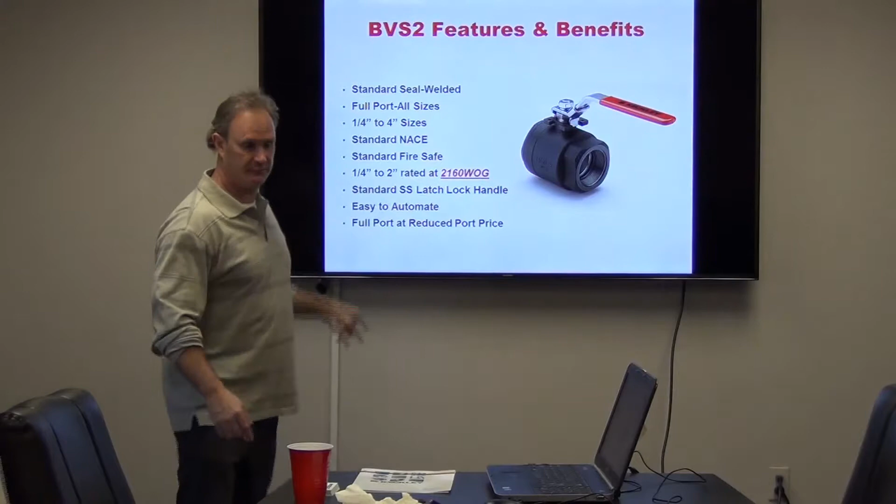Up to 2-inch, that's our size. We also offer these in 2.5, 3, and 4. Very, very rare, who the hell wants to thread a 4-inch? But we do offer them. And notice the bar or the lever on it, so you have more leverage. Bigger bar, not like those.

If you're looking at the competition on a BVS 2 versus all the specs I just showed you, full port, those guys go away. API 607 fire safe, you'll see that on a spec, those guys go. Last but not least, 2160. Most are rated to 2000, ours goes a little bit above. Everybody else is gone. That's why we released it, because there's no competition on that.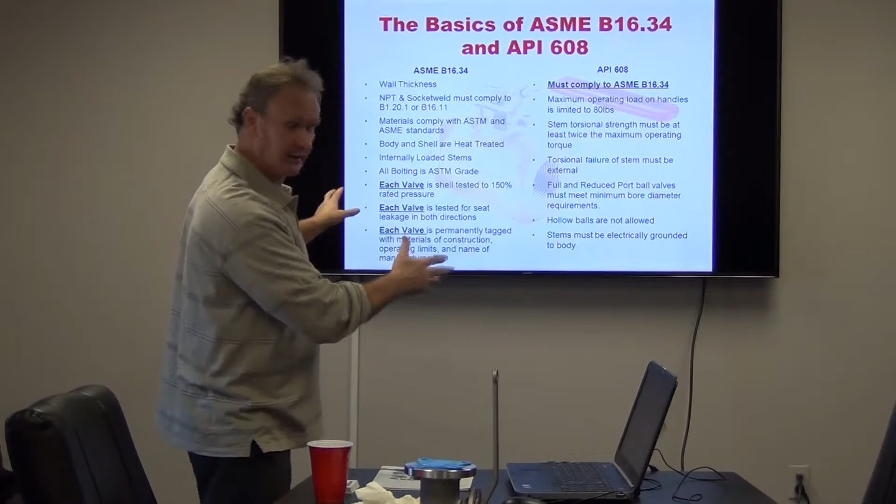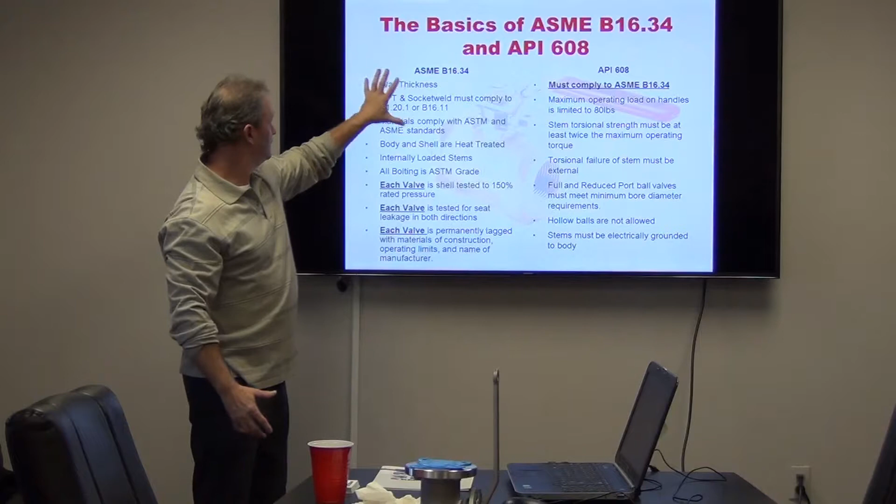Holy moly, that is an ugly slide. All you need to know is two things. I just showed you our BVS 2. Every ball valve that I talk about now is going to be ASME B16.34 and API 608. What does that mean? This is all the criteria for B16.34. That's the criteria for API 608. You will see it on a spec. That's all you need to know. When you know it, this is the best way to think about it too. B16.34, if you were thinking about college, this is your bachelor's degree.

Can't have this, you can't have that without having this - that's your master's degree, okay? All this has to apply before you can get to API 608. And you will see it on a spec. That's all you need to know.

Now we're going into these guys, and we'll run through these very quickly. That's ugly, you don't want to look at that. BVSC - remember I told you it's just like the BVS2? That wall thickness, that's the biggest thing. It's meant for oil and gas.

It's power gen. There's certain applications that have to have the B1634 and the API 608, and this guy's got it. If we see that on a spec, I'm not going to sell you the BVS2, I'm selling you the BVSC.

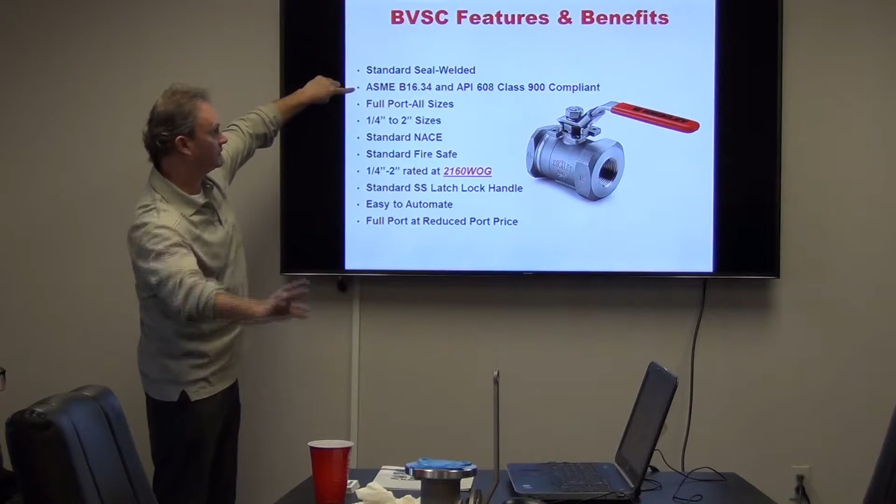Looks like our last slide, except that bullet point, right? B1634 and API 608 compliant, period. Everything else looks the same.

And our competition elimination slide tells me there is no equal in a full port. People got it in a reduced port, but they don't have it in a full port. We're the only guy that has it, okay? Nice selling advantage.

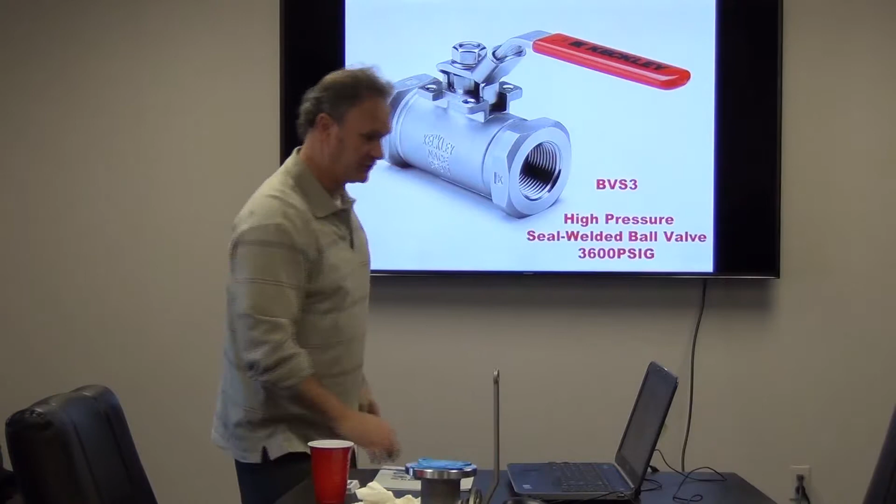BVS3, 3600, we're going up in class, right? Same thick wall, same B1634, same API 608. This slide looks very similar.

Up to 2-inch, standard latch lock handles. We offer a PEEK seat because the seats on the other one are RPTFE, or reinforced Teflon. Here, they're going to be Delrin AF, and we also offer it with PEEK seats because we have either higher temperature or higher pressure. We're going to move to a different seat. That's the only difference.

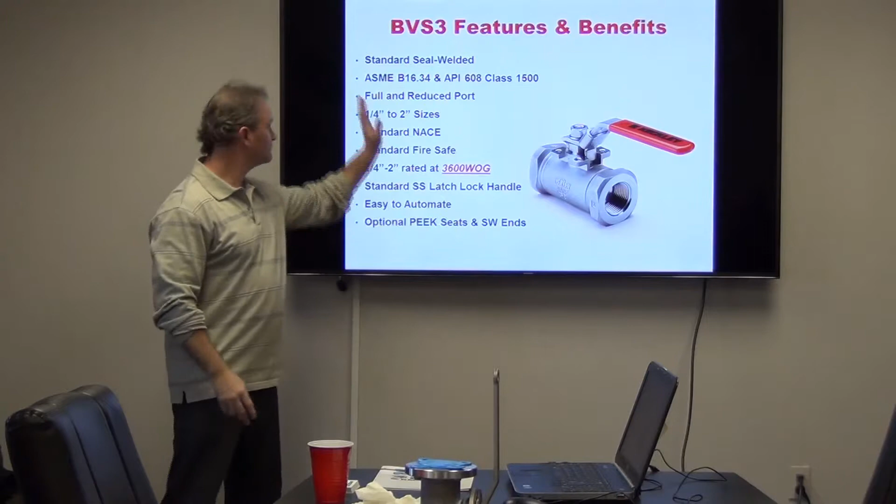Competition elimination slide - our list is getting smaller. 607 fire safe, those guys go. 1634, goodbye. API 608, see ya. Boom.

Drop the mic, there it is, right? Last one, BVS6. 6,000 PSI, right? Now we're talking the Exxons of the world, the BPs - big guys. Got to go meet with them, which we've done. Get on their AML, which we've done.

The pull-through is with you guys, and you will see it. Believe me, you'll see it on a spec. B1634 - yeah, that Mike guy from Chicago talked about that. API 608, there it is.

Up to 2-inch, standard NACE, standard fire, all that stuff you always see. Standard PEEK - it's offered with PEEK. Nobody's ever going to ask for this thing in a Delrin AF or reinforced stuff. It's going to be PEEK. That's the way we stock it.

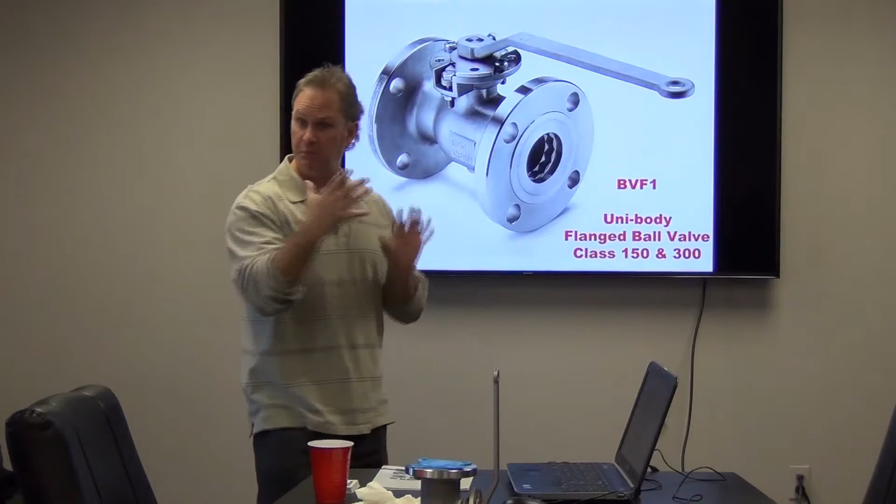150 and 300 pound. When we talk about a unibody, the first thing you should think of is reduced port. Nobody offers a unibody in a full port. It's always going to be a reduced port. One piece unibody, one piece ball valve.

Okay? Much like the other one, we show the reduced port, but we know it's 1634 and 608, up to 6-inch. The rest of it's all the same, right? Direct mount actuation, just like the other one has the mounting pads, that one has one. Easy to actuate - carbon steel stainless, easy, right? Two materials.

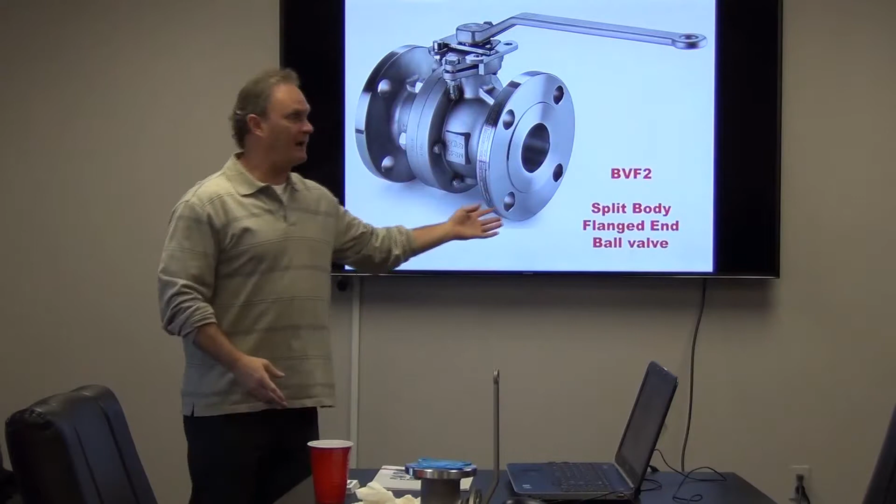Why do we offer a split body? Because we want to have full port. You have full port, you're putting two pieces together. Split body can be full port. Unibody, always reduced. I get that question a lot - people calling, no, you guys got ball valves? Yeah, I need a full port unibody. Nah, we're going to get you a split body.

Full port, up to 8-inch. Now we get a little bit larger in size. That's where we stop, those 8-inch. I had a guy that sent a spec in last week and it was like for a 10-inch or a 12-inch - not us. But everything else, once again, all this stuff kind of falls in line. I definitely don't want to bore you with all that stuff.

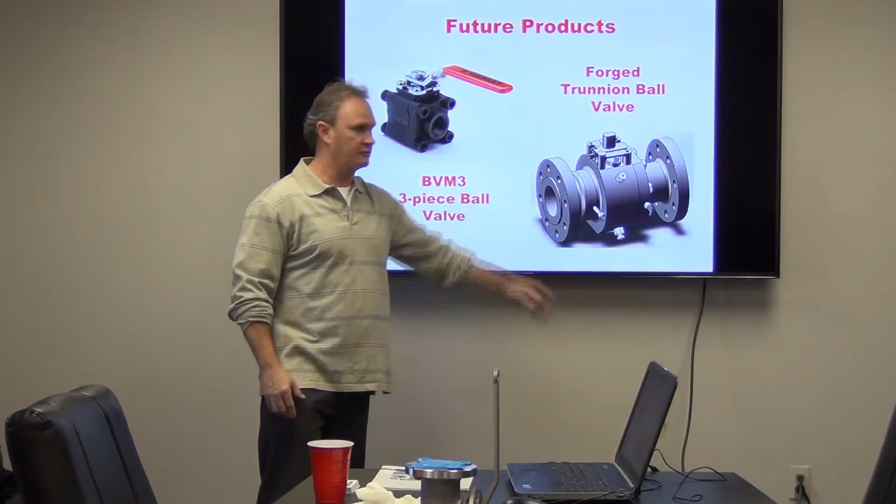I don't know if it ever will happen. That's really oil and gas, right? When you're talking trunnions, those are big honking units. So, and that's it. Yeah, we're just lying to you. We're just telling you we'll do whatever, but we won't. And that is 40 minutes of your life you'll never get back.

But the good news is you guys have a real good scope of what we offer. And the biggest thing I think you walk away from this is strainers, they do them. Check valves, price competitive, and we got them on the shelf, up to 24-inch in some of those. Knife gates, you kind of shrug, and if you bump into them, we'll see if we can help you. The legacy products are there. Pump accessories, very low cost.

And then the ball valves, like I said, it's a newer line for us. Now you can see why we got into it, because we knew the guy that developed these ball valves used to work for Milwaukee, used to work for Quadrant. Well, started Quadrant. And then Forum said, hey, look at this Quadrant guy, 18 million. Let's go buy him.

Forum bought Quadrant. Well, you know, if it's your baby and you brought it from the ground up, you want somebody else telling you what to do? Yeah, he didn't last very long in there. And then he was out. And then he started talking to our owners, and he goes, hey, you know what, I know ball valves. I know how to develop these. I know what the oil and gas market and power gen and the high pressure, I know those ball valves because I developed the stuff for Quadrant.

So it goes into a little more detail, really gets more into the ball valves. You'll see there's a real nice chart in there—I'll leave some extras here too. In that chart it's basically showing all the stuff we talked about. That makes it real easy because you just go down and check off what they're asking for on the spec.

That was my other thing—with the actuation, I know not all the valves they have are just handled ones. They have some actuated ones, but this in itself would be a great tool for Vic to go in and talk to. He has to get it approved by the engineers, and Sherry, the purchaser.

The actuation, we've had it now for just under 2 years. When we first started, this presentation was done specifically to address all manual stuff. Now that we have the actuation, there's a little bit more involved. If you look at that back page, you see all kinds of solenoids—I don't get into that because it's so detailed. Even for me, I have to have our engineering look at it. I can look at it and go, yeah, I think we could do that, but I give it off to somebody and they take care of it. But yeah, we do offer actuation.

I didn't make mention of it in the presentation—we opened an office, let me give you the history first. Quadrant was in Louisiana, and we had the guy who designed the ball valves, plus his second in command who took over when he left. He's one of our regional guys, specifically handles Denny Knight, handles all the ball valves. He lives in Louisiana, so he's traveling all over the place. Then they hired this girl, Steffi, who also worked for Quadrant, and because we service so much within the Houston and Oklahoma markets, which are big for oil and gas, we actually opened a location in Broussard, Louisiana.

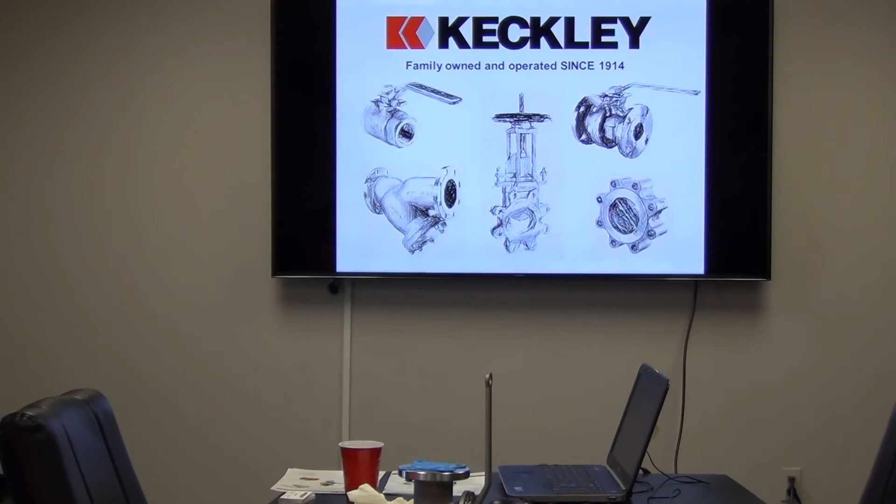I mean, it's a matter of if we can get, again, it's all timing, so it might be a couple months till I get the next order or something, but once that happens, if I can jump on it and get somebody to even go with Vic to them and say, okay, I'm going to set up a time to meet with the engineer that handles the valves, and we can show them, hey, it meets all these criteria that they're looking for.

Because I know that one of the API numbers is what's on the Jamesbury. Probably 607, I'm sure of it. Definitely 607. So they do actually hold their own AML. Yeah, I believe so. And then you gotta get everything approved.

That might be perfect for us then. I mean, that's the thing, they make up a drawing for everything. So on their drawing, it says Jamesbury. There's not going to be somebody else that's going to go in there because it's a lot of work to get them to do it.

It's shocking that we have that many approvals on that page this quickly. Within 4 years, that's a hell of a list. A lot of that has to do with the relationships that the guys from...

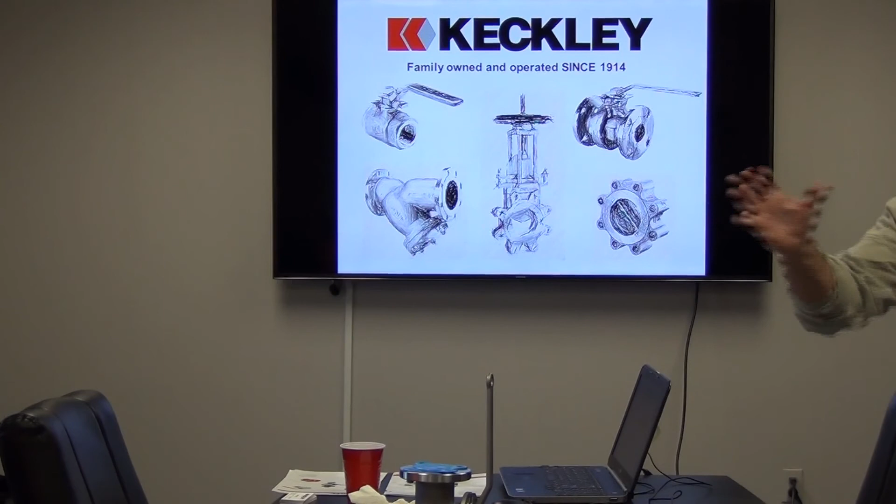They don't feel that, at least that's always been my thing, that there is any competition out there for them. So they say it's 8 weeks, it's 8 weeks, and everyone just has to live with it. No, there's no wavering with them.

Well, listen, we've had a lot of that come our way. One of the things that's not in those slides too, just another thing I was thinking of, is the API 641. You'll start to see that coming up on your AMLs and on your specs. API 641 is about fugitive emissions. So the EPA came out and said, hey, we can't have any leakage out into the atmosphere, right? This is hazardous gases and stuff like that. So the API board, American Petroleum Institute, the people that put all these things together, came up with API 641.

And our valves are the first ones that got tested to it, because Denny, our regional guy who's the ball valve guy, and Al, who's the guy that designed them, sit on the API board. So they knew that this was coming down the pike. We were one of the first ball valve manufacturers to go. Now the other guys are going to do it too. They're going to have to, because the minute the EPA comes in with a monitor and they go, look at that reading, that's way too much parts per million that's leaking into the atmosphere.

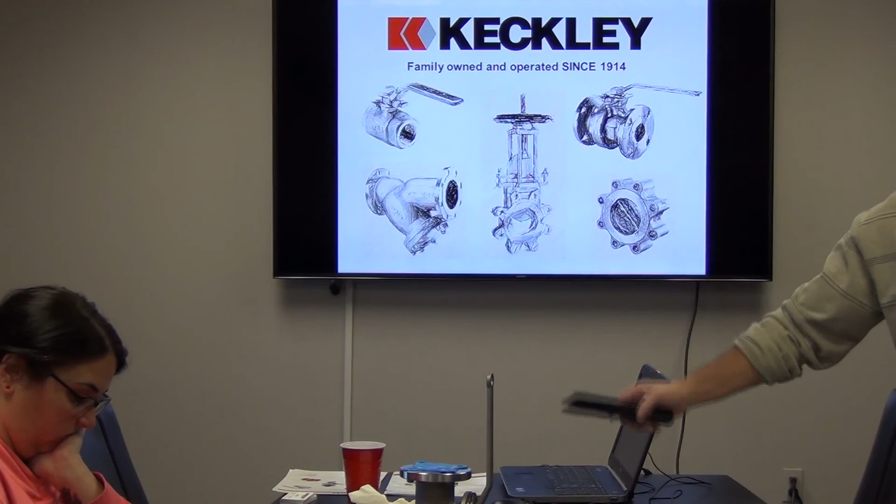So you're going to start hearing more about API 641. All you need to know is all the ball valves have been tested, and we now carry the API 641 certification. So that's another thing that could open the door.

Yeah, so if they have something, we've talked to chemical manufacturers in St. Louis. We're having the EPAs come in there and you got to take this thing out, this is way too much leakage. They have a little gauge that tests that.

So just things to kind of be aware of. Like I said, we're ahead of it because of the people that we have within our company that sit on that board, and it's given us a little bit of a selling advantage.

Good to know. Okay, got to add that into those slides too, because we're talking about it, API 641.

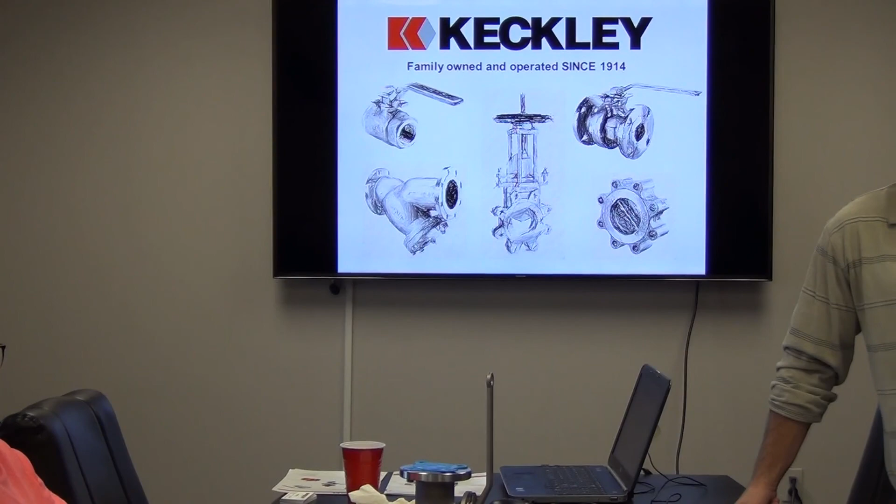Andrew's really pushing.